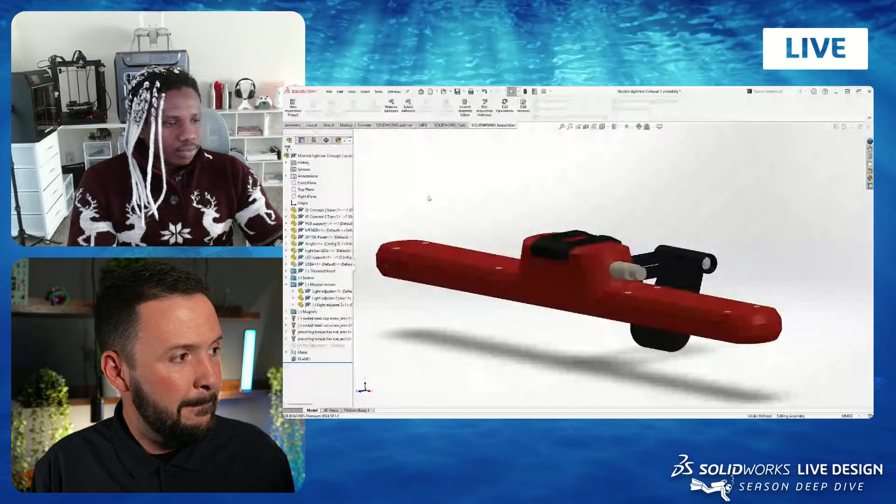Awesome, so what are we looking at here? Okay, so this is the monitor light bar. I designed this as the enclosure. Let me make this transparent a little bit, and then you can see all the electronics. I actually designed this thinking about all the components I need to use, and designed all those components in SolidWorks so I can make sure everything fits just fine. So this is the enclosure, and this is what holds it to your monitor.

So in a few moments, I'll be diving into the design process, the thought process, what I do to get to this enclosure.

I love it. A friend of mine posted on LinkedIn today—she was at a talk, and the person giving it gave a remarkable quote: 'I don't want you to leave this space heavy on ideas and low on execution.' That's why I love today's talk, because I feel like you're going to give us both ideas and how you execute, and how people at home can execute too when building enclosures. So yeah, man, I'm looking forward to it.

Let's get rolling. Okay, so first of all, I have a couple of slides I'd like to go through. When I'm approaching design, I like to approach it as a mechanical engineer and also like an industrial engineer, and you'll see that in a couple of seconds.

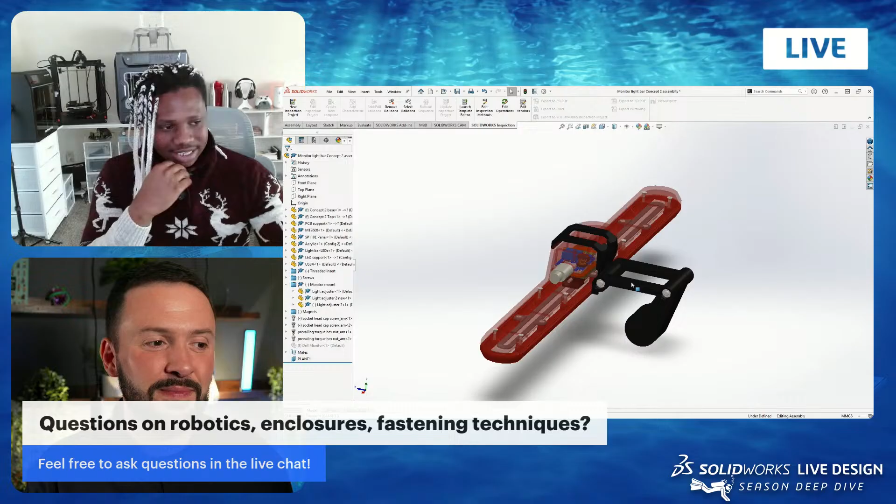I'm hopefully going to try to run through the slides very fast and then jump into SolidWorks, because I know that's what everyone is here for. The slides are mostly diagramming and examples of your work and sketching. You're not leaning on slides—you're giving proof of concept of what you're about to do. So yeah, let's see it.

Okay, so yeah, this is like a presentation image I did, and I actually rendered this using SolidWorks Visualize. There you go—Jesse Sprague will be proud, he's a member of my team. Some of you have seen him, but yeah, he would love this.

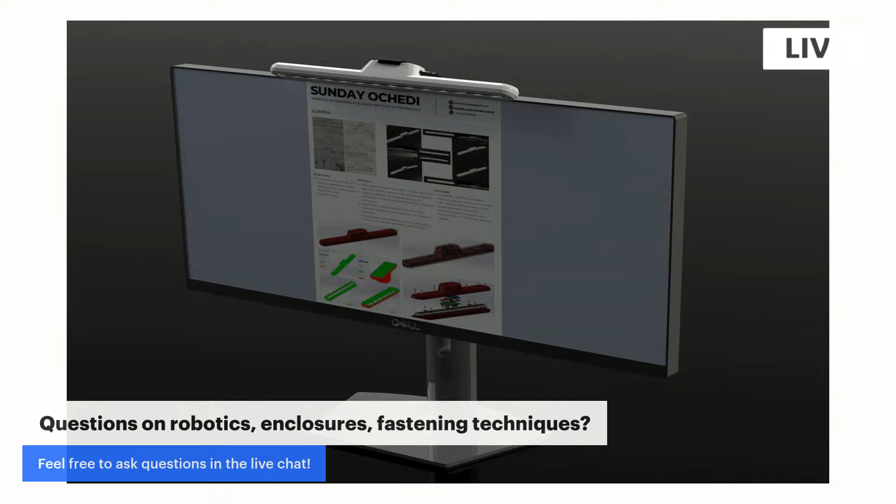Okay, so like I said, I like to think about design like a mechanical engineer and also an industrial design engineer. What I do is think about an idea—for example, the light bar design—and then I go online to look for different designs that exist, so I can think around it and see what I actually want. This is actually called a mood board, that's what industrial designers call it. They paste in whatever image relates to what they want to design, or something they can pick an idea from. So that's what I try to do.

I also try to make use of ChatGPT a little bit. So I taught a sort of mini course at 3D Experience World this year on different ways to use AI in a SolidWorks context, and I'm curious here, as many of us probably are in the chat, what was your prompt? What did you ask it for?

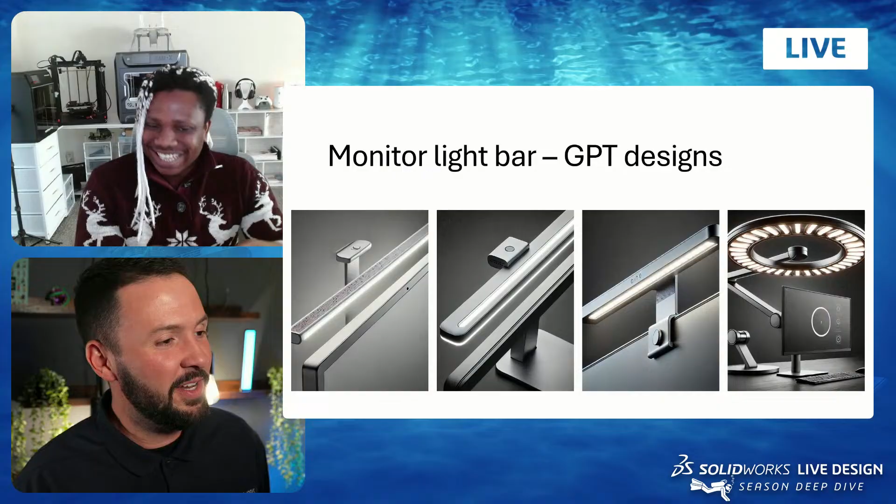Okay, so what I do is I just typed 'futuristic monitor light bar design.' Sometimes, like I always say, if you really know what you want, be very specific. But if you don't, and you want to be surprised or just get loose inspiration, be loose with your prompts. So I like to play around with ChatGPT—once I give it a prompt, I tell it to do something.

I would say maybe another, and then it comes up with a new picture, and then I tell it, okay, I don't like this feature, change this. That's what I like to do. I like to play around with the idea, try different things, and so ChatGPT keeps spitting stuff out. So I just pick the features I want, and then I come up with my own design based on everything I've seen.

Sweet, yeah, it makes sense to me. So you got your mood board, which people use for their lives, the future of their lives, they use it for projects, right? First time I heard it, I was like, what is a mood board? But you explained it so well.

And then you use GPT, a generative AI, to kind of give you different ideas. That's part of your process today. So this is a very modern process starting out here. I love it, yeah.

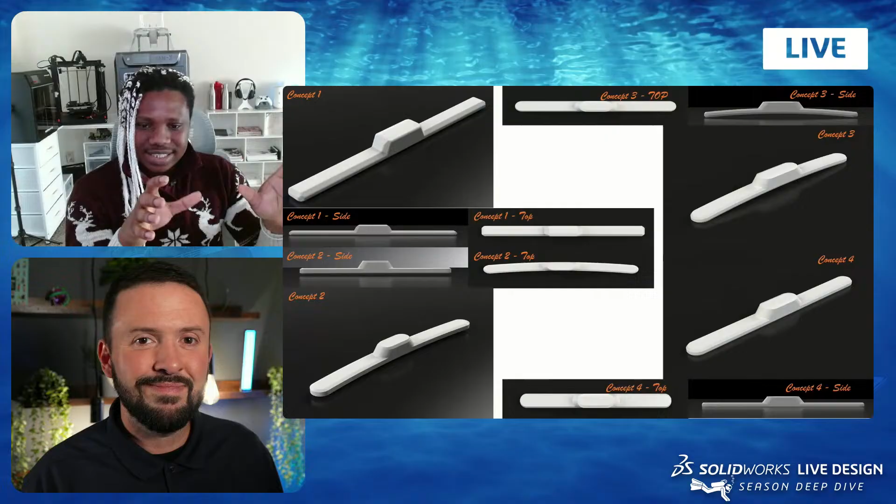So what I did was, after coming up with this concept, I actually sent it out to my friends. Oh, okay.

So first you do generative AI sourcing for the ideas, and then you refine it, and then you're like, all right, friends, let me know what you think. Let me check in with the humans. Yeah. So I send this out to them and tell them, okay, this is what I'm looking at. I want to design something like this, but which one resonates with you? Which one is easy, simplistic? Because that's the most important thing about design, making something simple but still eye-catching.

Sure. So most of them looked at it and told me that they actually prefer the second concept, I think. So that's concept two. No, the fourth concept. Oh, sorry. Concept 4. Okay. So your friends preferred it, and let us know in the chat which one you preferred. Obviously, this project's over. It's done. We're about to dig into it in SolidWorks, but let me know if you would have gone with concept 4. Let Sunday know if you're like his friends, or if you have other ideas.

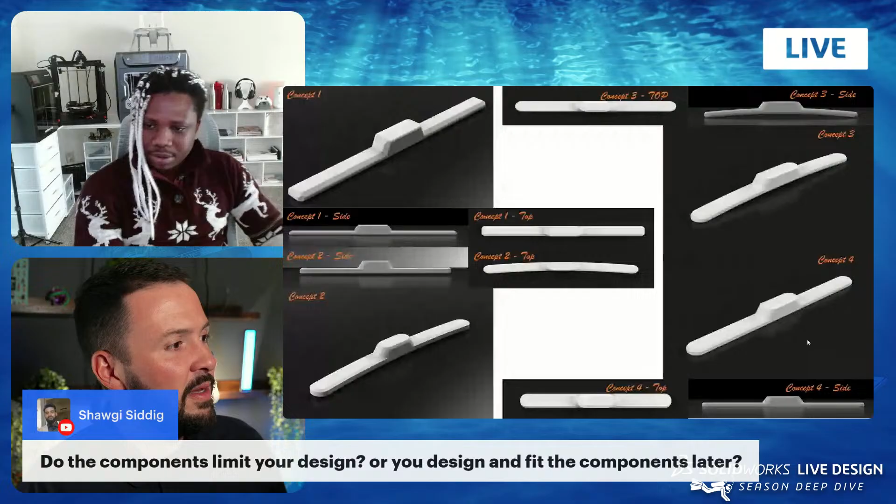We do have a question here from Shawgi. I apologize if I'm mispronouncing your name. So, Shawgi asks, do the components limit your design, or do you design and fit the components later? Okay, so they actually do limit the design, but something I like to consider first is, if you do have the physical components, you can stack them up and look at how you want to position them. So the main thing is I wanted it to be slim, and then I considered how I could place those components to be that slim.

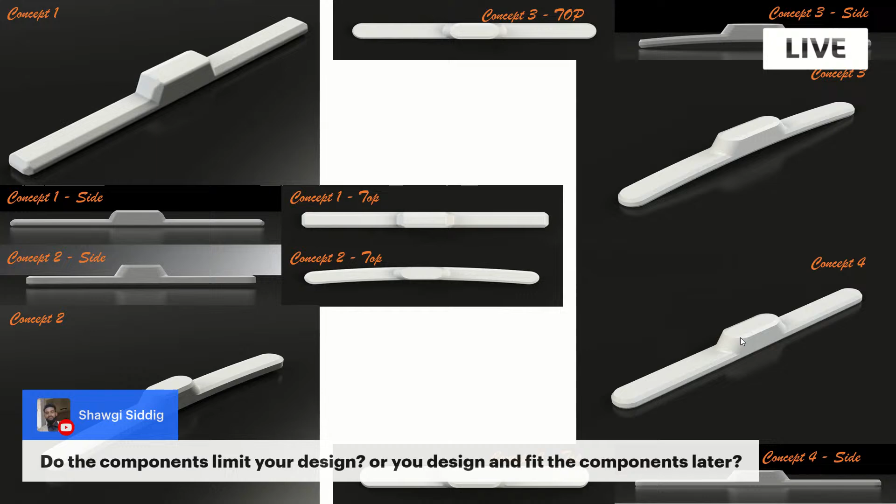And if you notice this, you have this bump up here. That's why it's there. All these bumps, that's why they're there. So I can stack up the electronics. Ah, then I see. Yeah. So the idea is once I have that, I could just make adjustments to the height and slightly the width to adjust everything. So it does play a role. It does limit the design process, but not that much for this particular design.

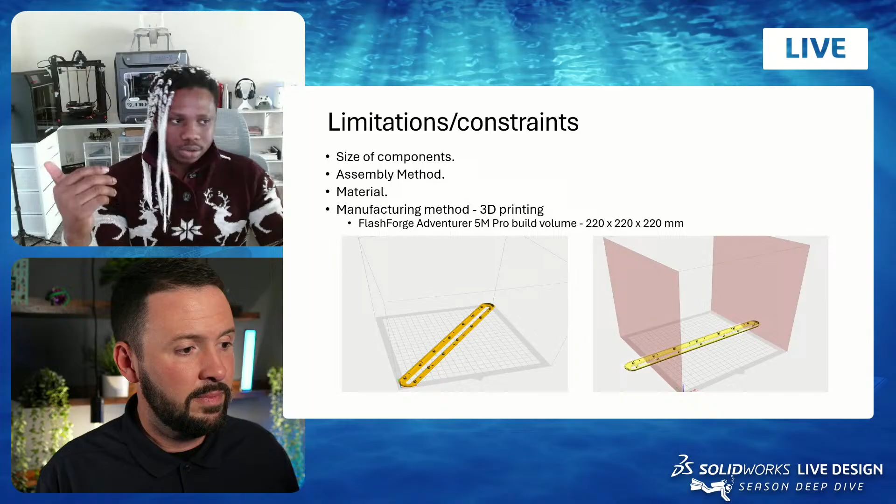And as you can see from the images I have, if I were to place it completely straight, I wouldn't be able to print that. So I kind of rotated it. And this actually played a role with the dimensions of the monitor, the design. So that's what you consider. Manufacturing, the size of the components and stuff like that, they're always important when you're doing the design.

So Sunday, we have some people just joining. If we could take a look at the SolidWorks model maybe one more time before we jump into it pretty soon, just to show people what we're talking about, because I have a question here as well. So you mentioned, of course, the build volume of the 3D printer. That is, of course, of consequence here, given what you want to use, type of material, the type of manufacturing.

Of course, you could print this. I'm not saying it's a good idea, but you could print this in a number of different pieces and then adhere them together. So what was your goal? I'm guessing in this instance, you wanted to have one continuous print.

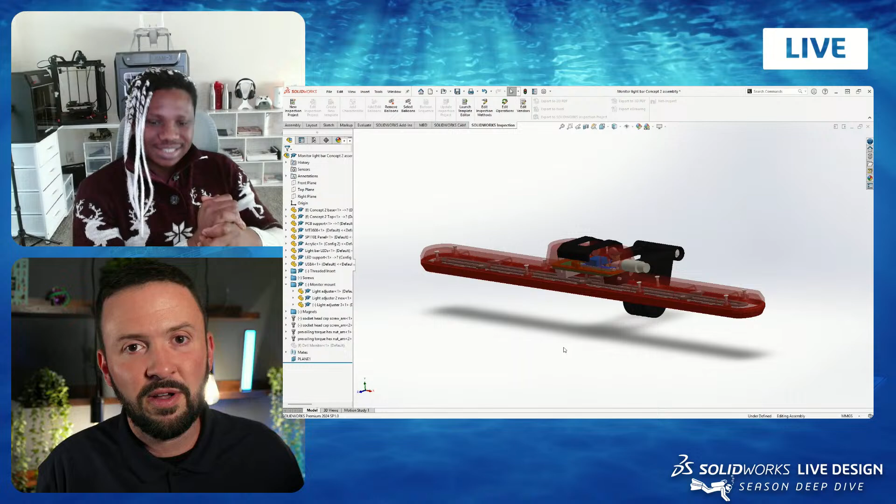Yeah, so I actually wanted to have a clean look. A clean look, yeah, that wouldn't be as clean, right? Or it would be really hard to. You'd have to do a lot more steps just to make it look like what it isn't, which is a continuous kind of surface and that kind of thing.

Yeah, so like I mentioned in the requirements, aesthetic is really important to me. So I wanted everything to be one piece, so it has a clean look and basically it's appealing to people.

Cool. Yeah, man. Thanks for jumping back in. We'll be back in SolidWorks, of course, very soon. But if you have more kind of pre-steps to look at, let's take a look.

Okay. So, like I said, manufacturing is very important, something you have to consider when you're choosing your dimensions and stuff. So next, I looked at existing designs, as I've said previously, and then I looked at the dimensions of most of them, and this is basically the dimension range I found for most of the monitor lights.

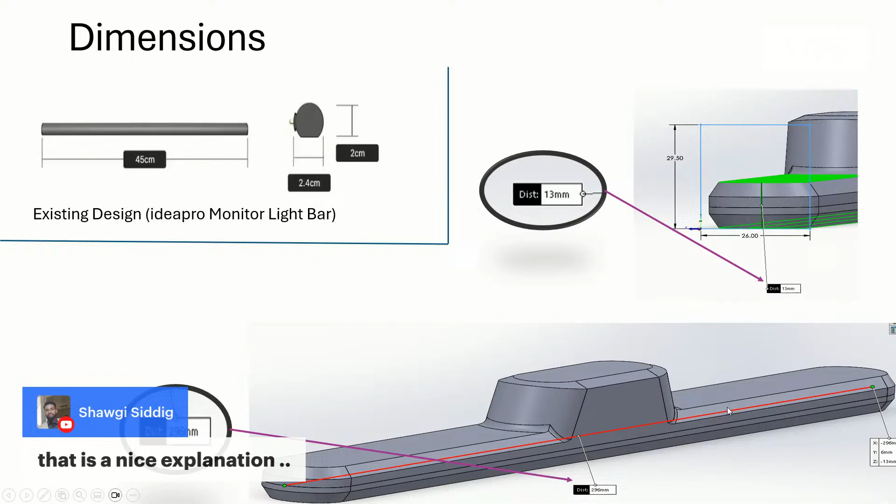So I decided to go for something maybe slimmer within that range, but try to accommodate my components and stuff like that. And that's what you see here. These are my dimensions for starting the design, and you can see this is the total length of the design, and this constraint comes from the manufacturing I already discussed before. That makes sense. Yeah.

So now to the part everyone has been waiting for. All right. There's a lot of different ways that we talk about this specific phase of the process, right? Where you don't just jump into SolidWorks or a tool like SolidWorks and just start doing stuff. Typically, you have your phase where you're thinking through what the structure is going to be

of your SolidWorks model. Like you said, you were sketching some stuff up, you did a rendering, sent it out to your friends. But as you start to think more about part, assembly, sub-assembly structure, how are you going to get into it? It's like a pseudo modeling step. So yeah, talk us through it.

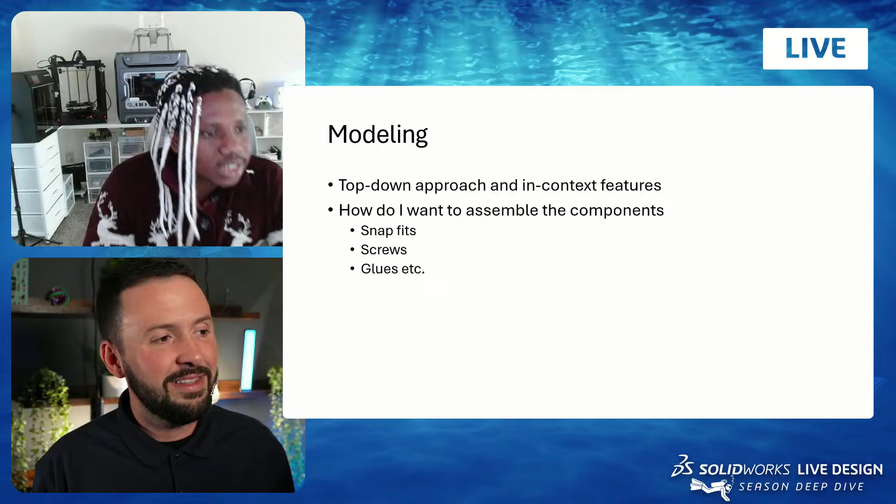Okay, so I actually use the top-down approach and do a lot of in-context modeling. I'll still talk about assembling the components, but right now let me just jump into SolidWorks and show you a little bit of what I did. So this is the final design that I currently have, the assembly. But before I got to this point, I started with this. So this is one of the base models, almost like one of the renderings that you send out to your friends, right?

Yeah. So this is the master model I used, and from this I did so many other features to bring it to what we have right now. Let me roll back and go through some of the features. So you can see this is just a chunk of block. Yeah, it's come a long way.

Yeah. So that's one thing with designing. You have to think your process through. Sometimes you can't, so you just jump into it and do whatever comes to mind. And that's what I like to do. I like to play around with blocks a lot.

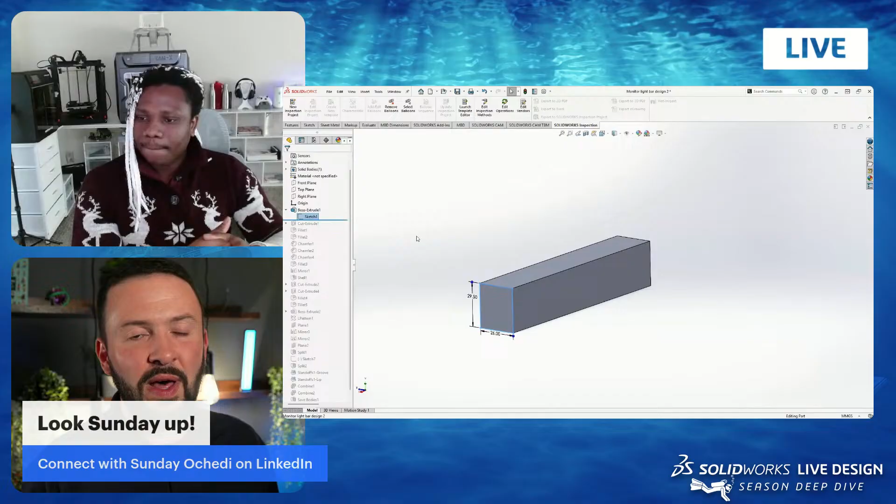So for our beginner users, a lot of us who have been designing in SolidWorks consistently for maybe over 2 years might know why you did this. This is often referred to as your base feature, in other words, the feature upon which and from which everything else will be built, right? So why did you choose a rectangular prism for the base feature in this case?

Okay, so basically what I was trying to design, the main shape is actually a rectangle before you add anything else. Where you start taking stuff away. Yeah, so basically just a block, and then you cut things away, chamfers, fillets, and then you get whatever you want. So that's why I started with this. It's a simple way of going into the design.

Gotcha. Josh has been there. Here's a pretty picture. Now engineer it to make it real.

Yeah, so once I had the square, there's the limit I want to go. So this way I can easily come back if I want to adjust my height, my width. I can easily come back here and just adjust it, and everything changes and updates. But

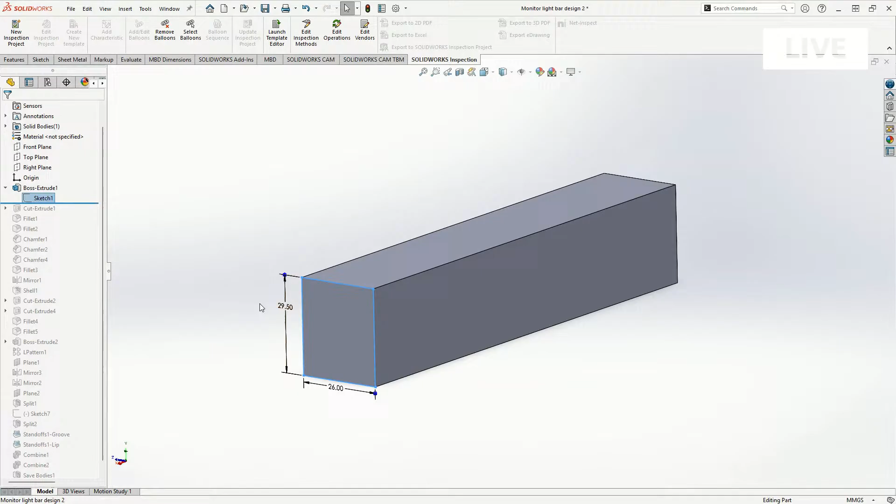SolidWorks, you must always have some features that fail no matter how you try not to. But yeah, there were a few features that failed, but not so much, and just easy modifications and then you're done. So, yeah, my design thinking here was quite okay. So

And then the next thing I did was to cut out the cross section. And just a little bit of context: since the design is meant to be symmetrical, I'm starting by designing just half of it, one part of it, and then I can mirror it around and get the full design. So this is half the design. And right now we're getting to the shape we know and love.

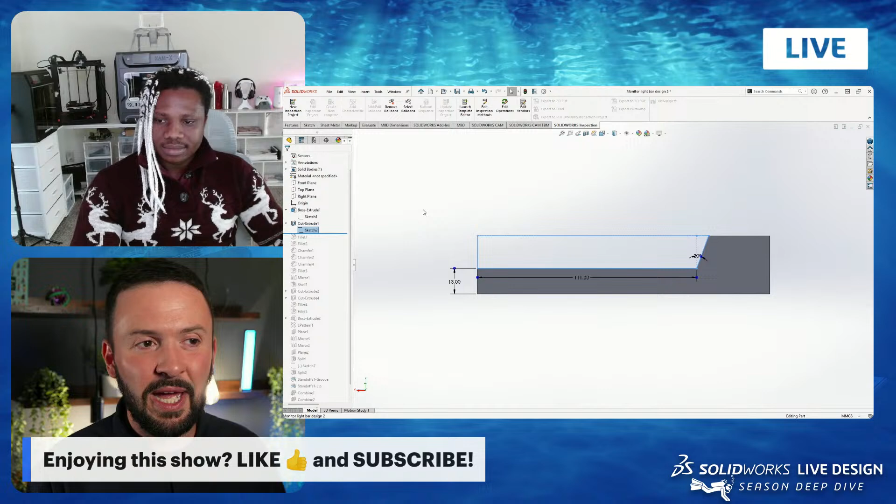Yeah, but it's crazy. It still amazes me, however many years of using SolidWorks, how things can really take shape from the first feature to the second feature in a tree. You went from just having a rectangular box where, if you're a beginner user, a lot of people would think, why didn't you make this a different shape, or why did you choose that specific length? And then as soon as the second feature rolls down and loads, it's like, all right, I see it. I see where you're going.

Yeah. So the next thing I did was to do some fillets just to get this curve. Most of the time it's good to have your fillets at the end of your process, but sometimes you can't avoid it, or sometimes you just want to see how the design looks, so you just put it in and see if it goes well. I think that was actually the case here, so I just put in the fillet there.

And also considering the fact that I'm going to do a mirror, I want all the features to be there. So I added my fillets to get the nice curve on the edge, and then some chamfers. And now we're really looking good. It's getting close to what we have. And I think there's another layer of fillet. So we have this, and I was pretty much okay with this.

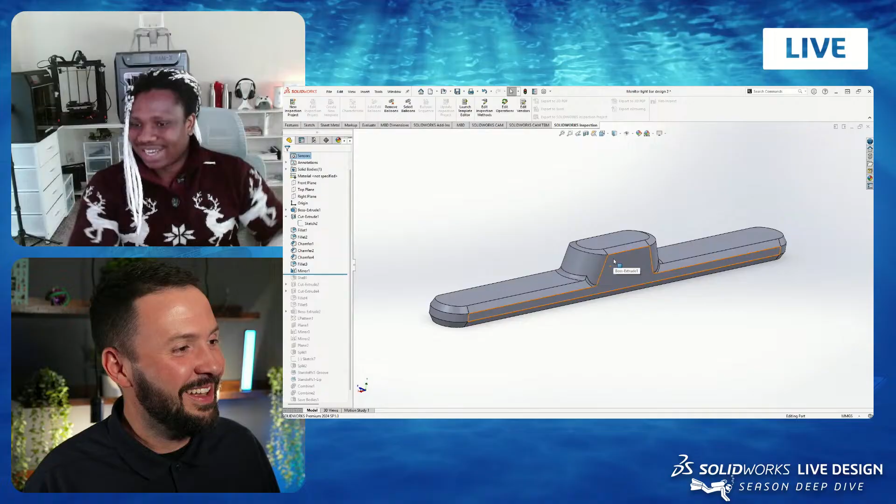And the next thing I did was mirror it. So we have the complete enclosure design, but everything is still solid inside. So this is actually what I sent to my friends: okay, take a look at this. Is it nice? Is it okay? And they gave me a thumbs up. So I went with this design.

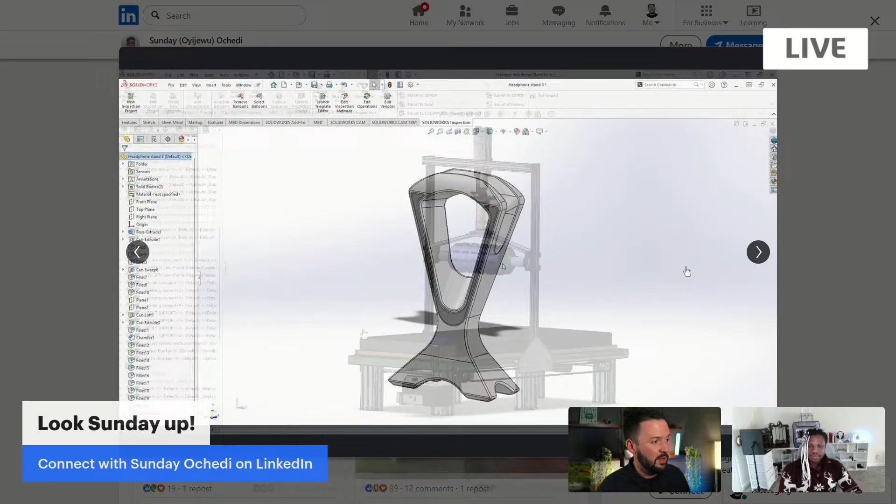A lot of them we've seen, and it's actually how I came to know you, on your LinkedIn, right? So I wanted to just take a minute here to plug you. I usually save this for the end, but you have a lot of really neat designs here. Maybe you could talk through a couple of them as we cycle through.

Yeah, so most of my designs are actually inspired by some things I see, and some of them are actually products. And most of these designs you're showing right now, like this one, are designs I did way back when I started using SolidWorks. So it was kind of a learning process, doing a lot of stuff. This was actually one of my first designs, which is really not that great, but over time I got good. I try to integrate mini industrial design stuff as well as mechanical design stuff.

And one thing I always do is I never shush someone when they're trying to explain something to me, even if I know it. It's a process of learning. The person has a different way he does something. So once the person says it, I get that idea. It's like an extra tool in my toolbox. So yeah.

Just before we get back to SolidWorks here, this one really blew up. Yeah, this setup here. Let us know in the chat if this is a bit too much for you, or if you would love this setup. I know we all have our preferences, but tell us a little bit about this before we go back to SolidWorks. Let's spend some time here because I think a lot of us would be curious about this.

Yeah. I actually had a lot of people in the comments complain about too many screens, and I had to explain to someone that all the screens there have their purpose. So I have my two monitors there. That's basically where I do my design and stuff. And then my laptop on the side. So I have everything I need on those screens. I use one monitor to work on SolidWorks, and the other one to open maybe specs that I want, or to look for components online that I can fit in, stuff that I could buy.

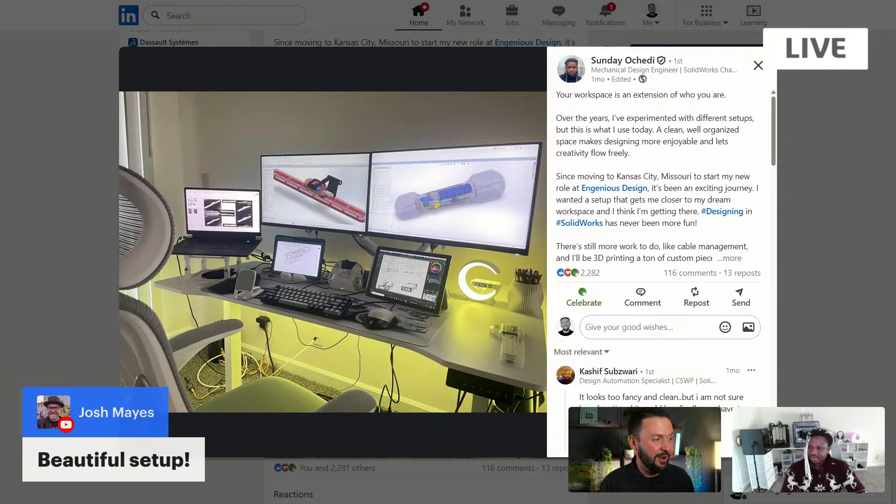So now back to CAD. Okay. So after doing this, because I already had this set up, the next feature is to shell. Yeah, I'm always anxious at this step, whether it's gonna shell or not. Although in recent years, I feel like SolidWorks has definitely gotten better about telling you what doesn't work. I think the shelling feature mostly has problems with your fillets. Yeah, that's major. That's what made me nervous about this one, but you got it to go and it looks clean.

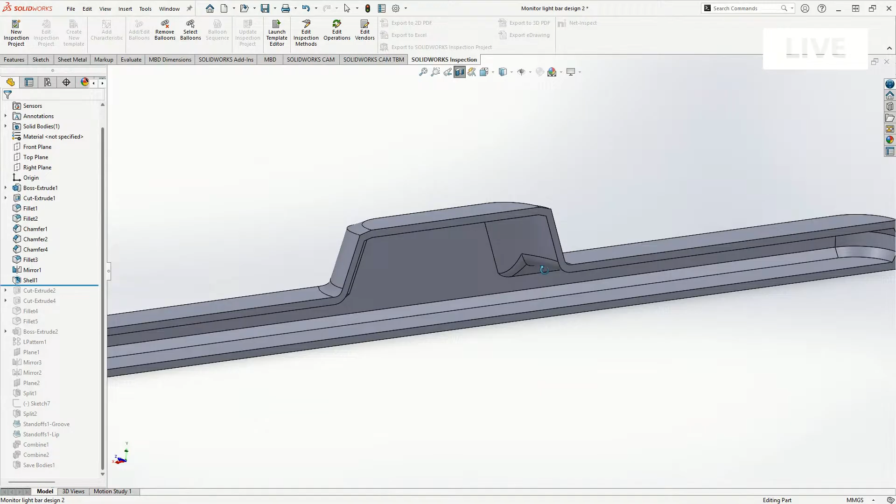Yeah, so you have to play around with your fillets to ensure that you get something good, especially at this point. There's one important thing when it comes to designing to produce, especially DFM, when you're trying to do injection molding or something. You have to have completely uniform wall thickness. That's one of the things you need to do. In some areas you might deviate from that a little bit, but it's always advised to have that.

And the shell feature actually tries to do that, and that's when you get an issue if the fillet is too small, because it uses the outer fillet depending on if you're shelling inwards or outwards. So it uses the fillet's diameter or radius. So you have to adjust to fit what you want and ensure that you have a good shell feature. In my case, I'm using a 2 millimeter thickness for my enclosure.

That property manager is pretty simple. There's not much going on. Like you said, you define the wall thickness, any faces you'd like to remove, which you don't have to. And then a couple others there. You could do multi-thickness if you wanted to have differing thickness at different areas of the model. That's a really good tip, especially in regards to DFM, design for manufacturing.

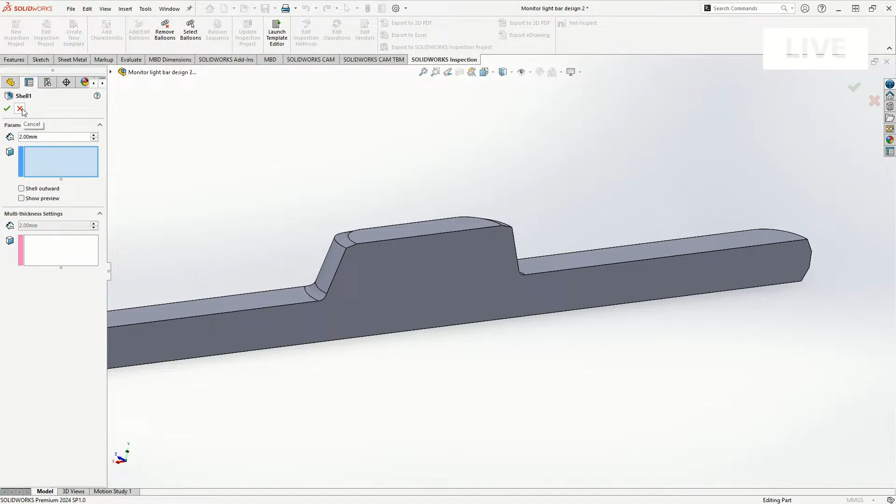I wanted to ask you how you acquired some of this knowledge and some of these skills in terms of making enclosures. Do you find you're doing them more for your job or more for personal projects these days? Or maybe equally so, as part of your day job as a mechanical design engineer? It's mostly personal and then a little bit of work stuff, but more personal.

We could probably have you back for a whole lecture on robotics, which we probably have to at some point. I would love to be back. Yeah, man, this is great. I'm having a lot of fun.

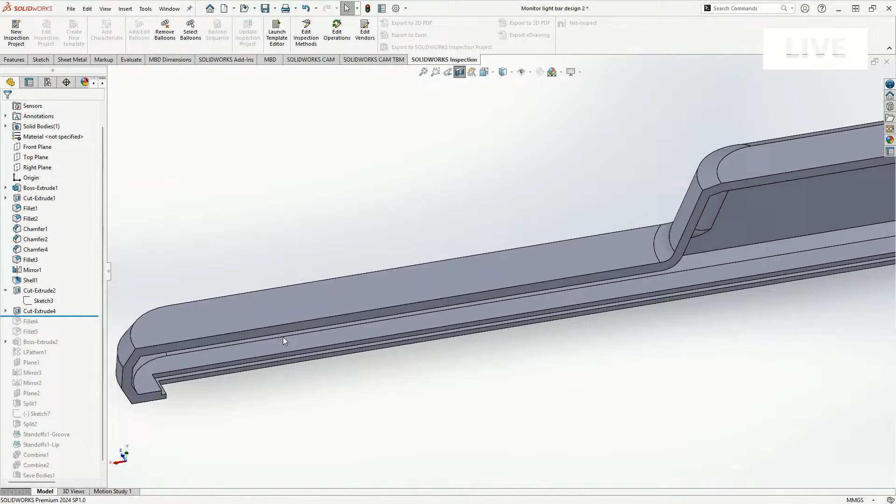So we've just shelled the model. So where are we going now? So now I'm trying to make a cutout for the LED lights that I'm supposed to put. This is the cutout I made here. Oh, interesting, I see. That's where the light is supposed to shine through. And after that, let's see where we are now. So this is the next process.

This is kind of a platform where I could lay an acrylic sheet, so it's transparent to allow the light to flow through and also hold the light in place. Oh, okay. So that represents a different type of material. But so far, SolidWorks wise, you haven't defined a material, and that's fine for the purposes of why you're doing this. That's good to know.

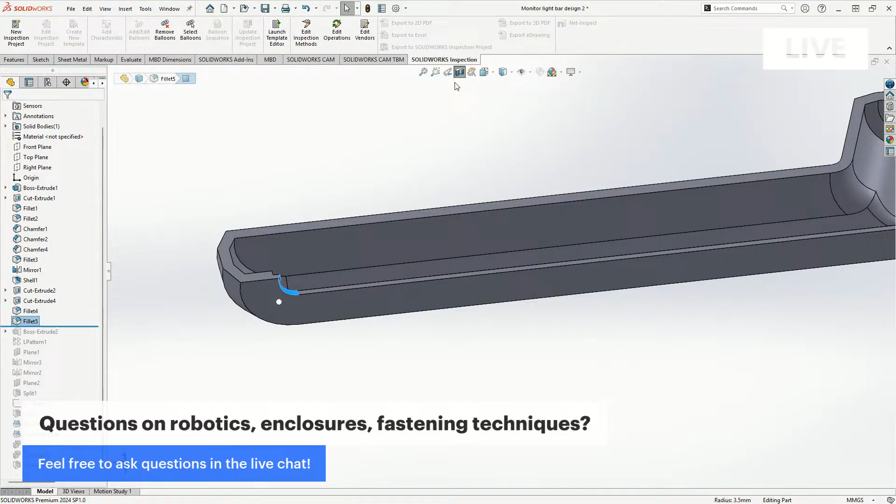So I mostly define materials when I want to know the weights and stuff like that. But most times I like to print with PLA because it's actually good for a lot of stuff I do. They don't really have much engineering requirement; that's most personal projects I work on. And even if they do, I play around with PLA to get the sweet spot. So I did a few fillet features to shape it so it looks a little bit nicer outside to follow this curve.

Now, of course, this is an enclosure for LED lights, right? So I guess at this point you are considering how the light will cast, right? Yeah. Cool.

So from here you could move to splitting the part. But what I did was I created some extruded bosses for screws, which you can do with a SolidWorks feature, the fastening feature, and just do mounting bosses. But here I just did an extrude myself. That feature, man, I haven't seen anyone use it in so long. Let us know in the chat if you do use it. That's definitely a rarity and a bit of an Easter egg during this episode.

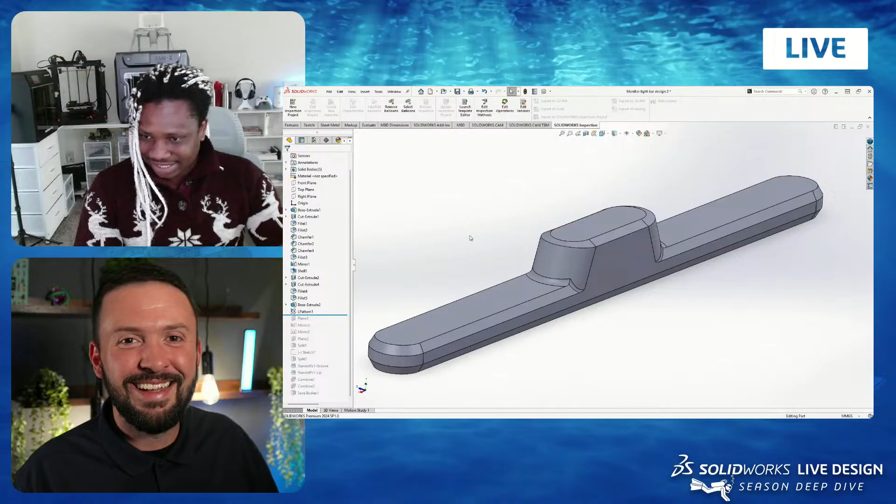I'll actually show it because I used it somewhere else in this design. Oh, cool. They're gonna see it. Very nice. So I did this and then just mirrored it. So you got a pattern and then you've mirrored it.

Let's try to go a little bit faster. The next thing is to split it into two parts, the top and the bottom. So we use the split feature, but I don't actually know where to find this.

Most times I just use the search command because I know what I want, and it comes up. Honestly, even working at SolidWorks, it's still the same thing - if you know where to find your S key on your keyboard, you know where to find almost everything.

Especially now, just to drop a quick tip that came out a few iterative releases ago - I believe in 2025 SP2 or FD3. We've actually improved command search. If you go into options, into Tools Customize, the same spot where you'd look up keyboard shortcuts, under the keyboard section, you can now add extra search terms.

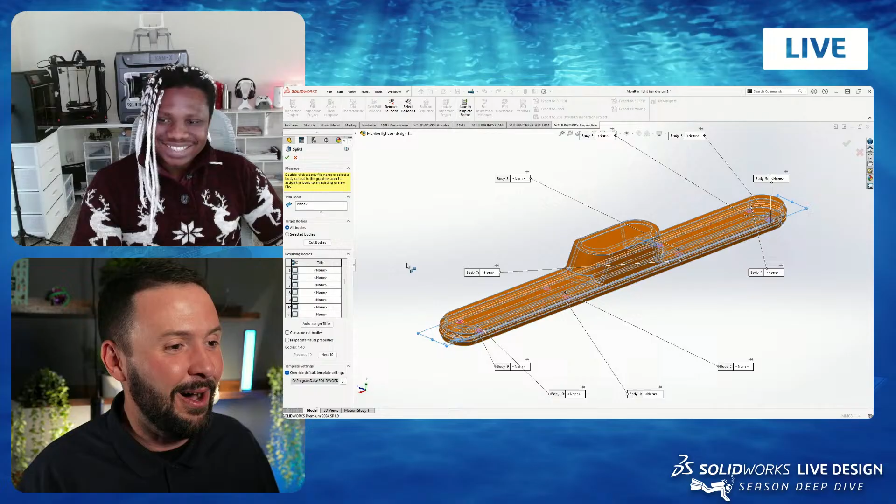Split's pretty obvious, but I'd say you're splitting bodies... maybe, yeah, it's not obvious. I don't know, but I just wanted to throw that out there. Yeah, that's really cool to have.

So when you're using the split feature, normally you can assign a title to it, and once you click OK, it saves the bodies separately into separate files where you can name them what you want. But here I'm not doing that - I don't want to save it into separate files yet because I still have a lot of stuff I want to work on before saving it as a part file.

So what I do is I don't click on assign name, I just click on the two components I want - these are the main components. We have all these other components because of the extruded boss I did, then the linear pattern. I didn't merge them with the existing parts, so that's why we have a lot of them there.

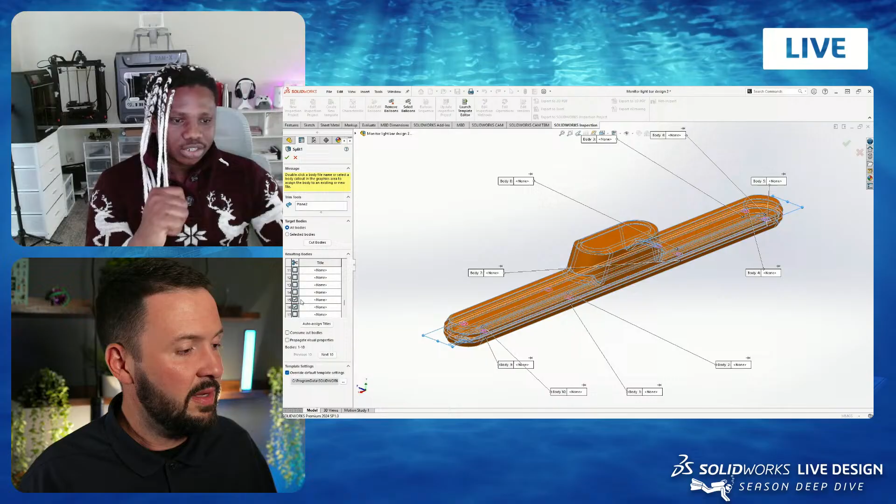So they kind of act as body splits in and of themselves here. I just took the two I needed, the top and the bottom, and clicked OK. So it splits the bodies into two, but you also have the other linear pattern and stuff there. That way I could work with two of them.

The reason I didn't save them into different parts already is because I wanted to add a lip and a groove, so these components can easily mesh together and you can screw it easily. You don't want just a flat stop or something.

You mentioned at the very beginning your sort of pseudo modeling plan was to maybe use some in-context features. Split in a way is kind of like that, right? You're basically building everything within the context of itself, the original context. Once you break them out into their own part files, of course they're going to fit together unless you alter them after - they're built together. So yeah, I think that's a pretty wise approach.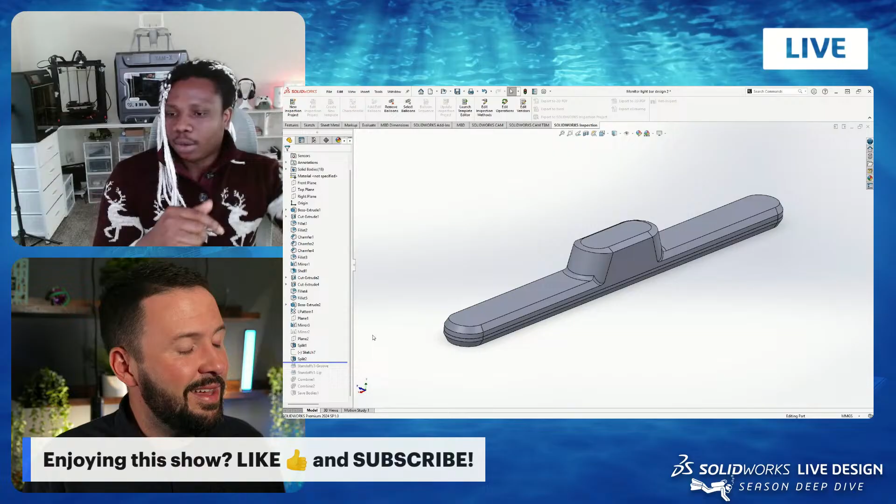I did it this way so I can easily, if I notice something with the assembly that I want to add, do it in this main master model, and then it updates in the body and goes back to the assembly. So it's something easy I can work on.

So the next thing I did was a lip and groove - basically just so they... look at that, yeah. Man, this is another one no one ever uses anymore.

Before, I would come up with a sketch myself and try to do the dimensioning behind that. But with the fastener feature, you can just go down to lip and groove, and it's an easy tool to use - you can just play around with it and stuff like that. So this is how it looks like.

That's a great use for that tool.

If you guys have SolidWorks, add that extra shortcut for the search menu. Just add Sunday for lip and groove. Forget the name, you'll remember who said it. Yeah, that's a great use of that tool.

How did you, just out of curiosity, like we're all learning at different paces, different times, different years, come across that feature, the lip and groove feature initially?

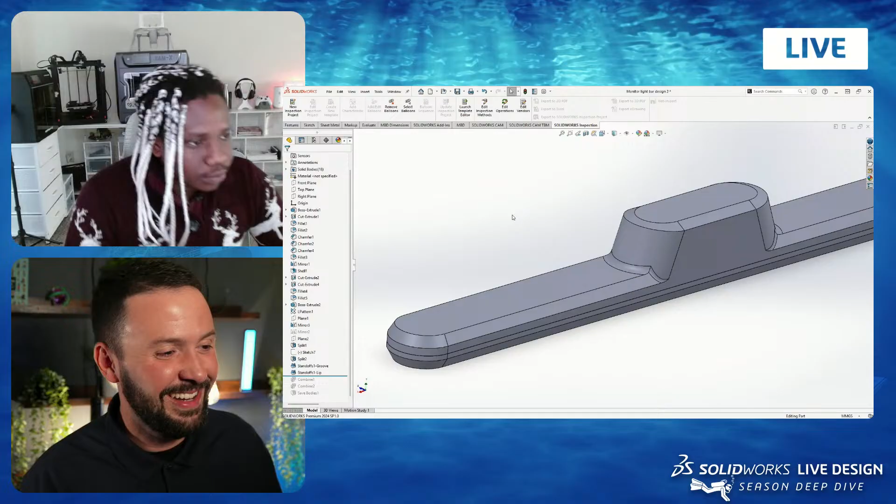I've actually forgotten, but I forget a ton of stuff. I think I got it from a YouTube video because I always like to look at design videos on YouTube. That's a good way of improving yourself, because you end up learning something that you might use later on, but you don't know it yet. And then when you're working on a project, it comes into your head, and you're like, yeah, that's good.

And I know we've all been here too - if you don't remember exactly what happened, that's what your YouTube history is for. Just find the video, rewatch it. YouTube is a really good tool - SolidWorks has a lot of people posting videos, so it's easy for you to get what you want. And if you don't see it, what I always like to do is spend a few hours playing around, and then you finally get it. Once you get it, it's hard for it to go.

Yeah man, you can always do file, new part. For some reason the feature is not actually opening, I don't know why, so I'll just keep it for now.

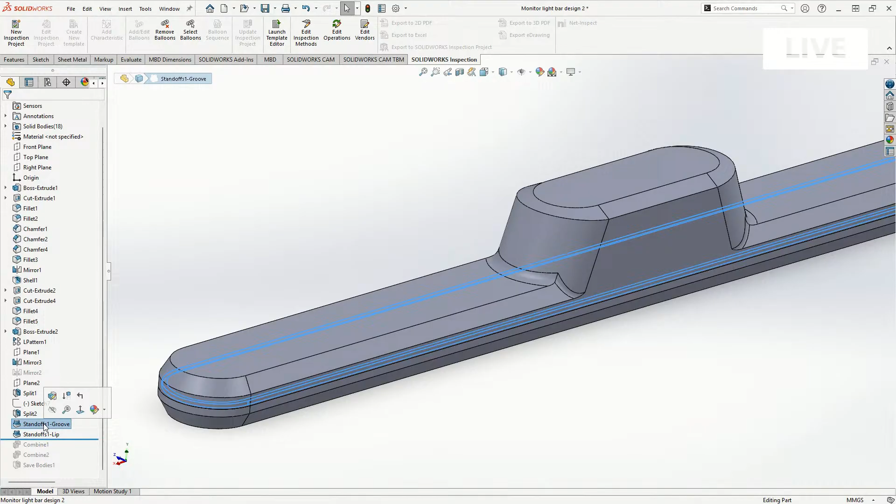What was the intent of that one there? What's it doing? The lip and groove feature - you just add a little bit of the thickness you want to leave, this height, and then the distance you want to keep between the two components, just like clearance so they can fit in together. And when you're doing this, you also consider the tolerance of your manufacturing method.

For me, since I'm going to be using a 3D printer, I consider that. I normally give between 0.2 to 0.5 because that's what I found most of my printers are within that range. So whatever I do that way, it fits in. That's what I do.

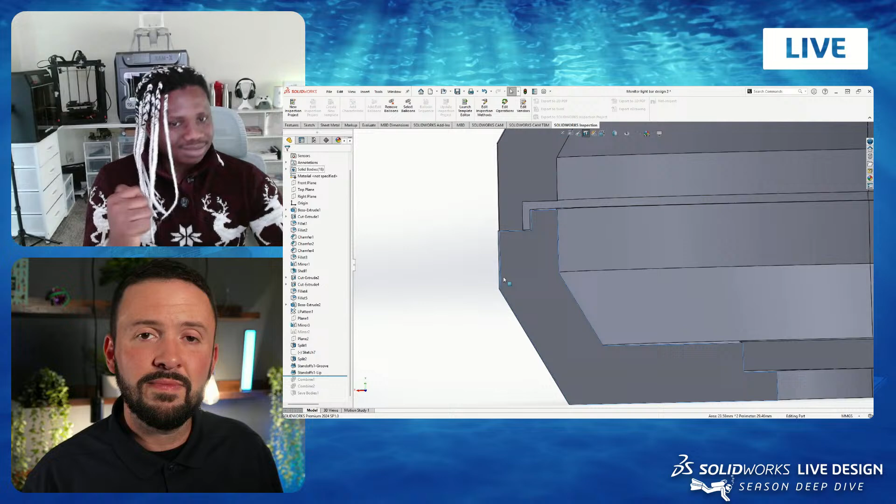And then here as well, so it mates and you have this flush to this, so that's why you give a gap here. Because if it's completely flush, like I said, your manufacturing method may ensure once this face touches, there might be a gap out here, and you want to make sure this is completely sealed outside. So that's what I consider.

So after this, I just combined the features I have, and then I saved the body. To save your bodies, you go to the solid bodies here, right click, and then you have save bodies. Once you do that, you can save them and give them whatever name you want, and then it's saved.

And this is actually good because whenever I come back here to make a change, all I do is just roll this back, do whatever I want, and then drag it back. It saves back to the part I already have, and then I can use that in my assembly.

That's very cool. It was like when I first started learning SolidWorks, the history-based nature of this and how you can use that to your advantage with the rollback bar. I continue, all these years later, to appreciate that to this day.

And I wanted to mention too, like you mentioned, save bodies - of course you just go up to the bodies folder, which will automatically, by system default, display if you have more than one body in a part.

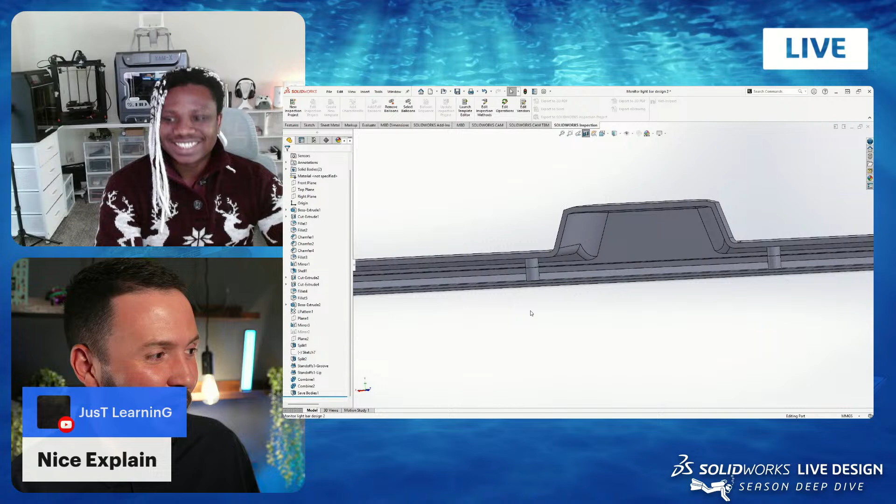Very cool, so I wanted to give a little bit of context for the combine features. We have two combines because we have two components, majorly the top and the base. Remember, before I did an extrude where I wanted to put my screws and stuff, so I also split this. So the combine is to combine the top part to its associated top or bottom pieces, and the second one is to relate it to the base.

Awesome, thanks for exploring that. I actually wasn't clear on that either.

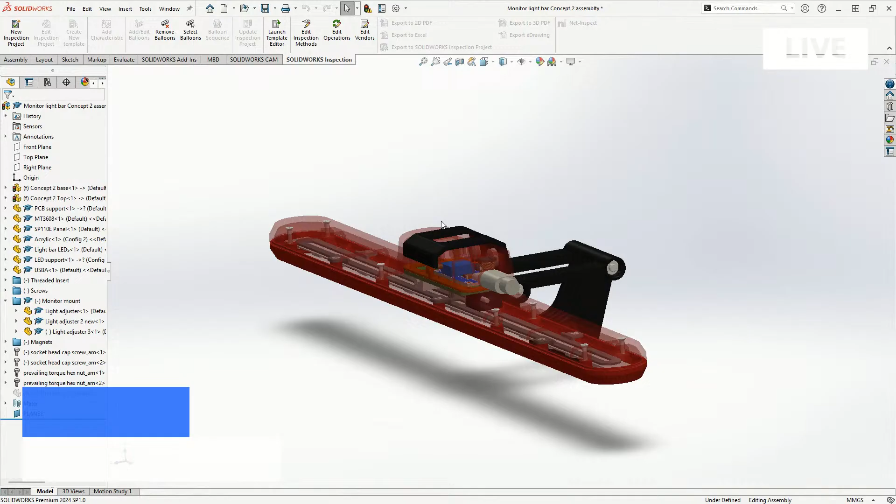So let's jump back to our main model. The next thing I'll do is go through some of the components. This is the top. It's updating because of some of the features I touched in the previous one. You've got a lot of linkages going on here. Yeah, so let me just scroll back a little bit and show you.

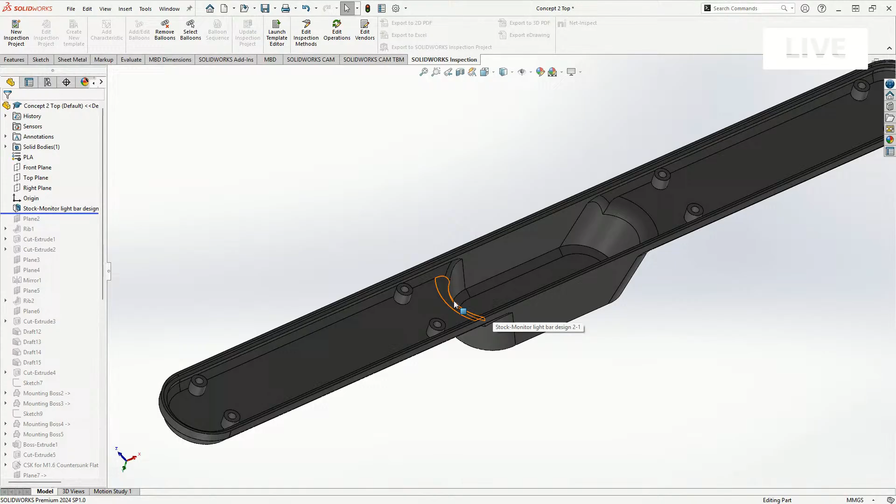So this is why save body is good. This is what comes in from my master model, and so I can work with this and see. You see the desire inherently to do that too. Like you started off that part and you already have that base feature - your last part was a rectangle, and now your base feature in this one is a very well completed, well progressed top part of your design. So I see that very well, it's very nice.

So it's just when you're designing, you try to make everything as simple as possible, so you don't have a lot of features lying around making your computer run a whole lot. That's what I try to do, and these are very good practices when you're designing something.

So next, I wanted to add some features for considering designing for injection molding. You can't always know everything you want to about injection molding, that's the thing - you always need manufacturers, but it's good to have an idea of some of the things that need to be in place. Then when you speak with the manufacturer, they can point out a few things you need to adjust and so on.

For this, I needed to add ribs to structurally make it sound - if I'm printing with small dimensions, like 2 millimeters, the rib will support it. To do that, I used the rib feature. For the rib feature, you just have a sketch which is just a line. I did a couple of lines and then used the rib feature to extrude this down.

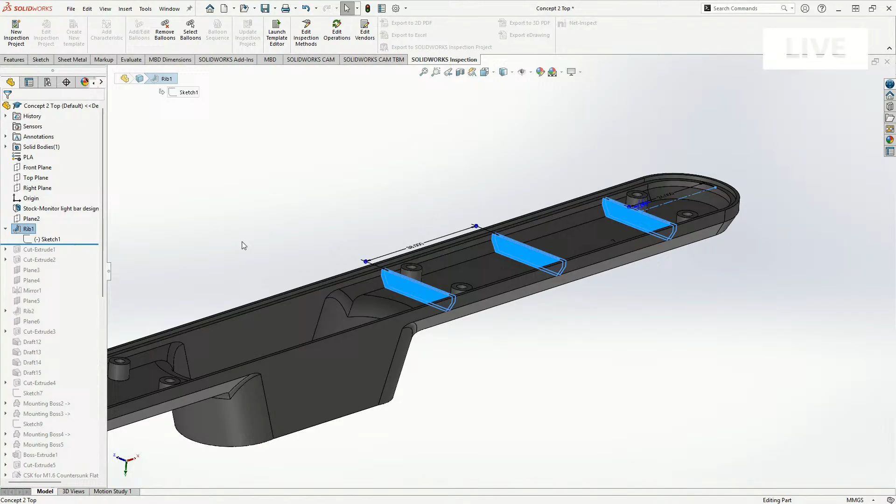And most times it doesn't always work the way you imagine. There's a lot to think about, a lot to consider, but when the conditions are met, it usually works pretty well. If you have a simple design, simple feature, it can work right off the bat, but sometimes you just have to play around with it and then you get what you want.

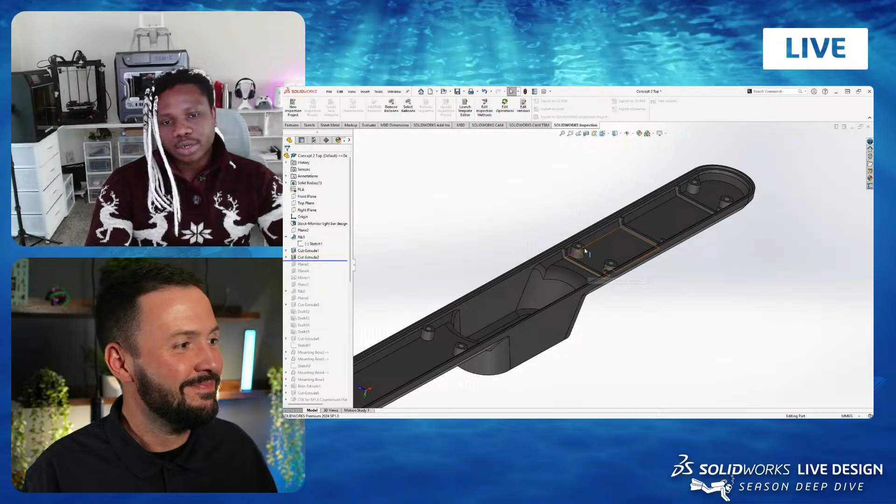Yep. Yeah. So just playing around with this and then cut them to shape the way I want it to be, to structurally support this. And there are some designs that actually have some going vertically this way, but I wanted to make it a little bit simple. So I just did this. I don't need too much feature. It's not really that important for my case.

And then I mirrored these features to this other side. Remember, I said this is symmetric, so most of the stuff I'm working on can be mirrored. So I mirrored this. And then for this part, I also did a rib, as you can see, and then cut it to fit what I want.

And then these are some draft features I did, but I'll talk about that later. For now, I'll just skip that. I'll talk about the reason why I used draft, and it's basically just for DFM, for your manufacturing. And so this is the boss feature I told you about that I'll still come to talk about.

And what I did here is there are two ways you can use it. You can use it for your screws. You can also use it as a pin where you have something just supporting components. Yeah. So components that have just small holes that you can't actually drive a screw through. So they are very useful. Pins are actually very useful.

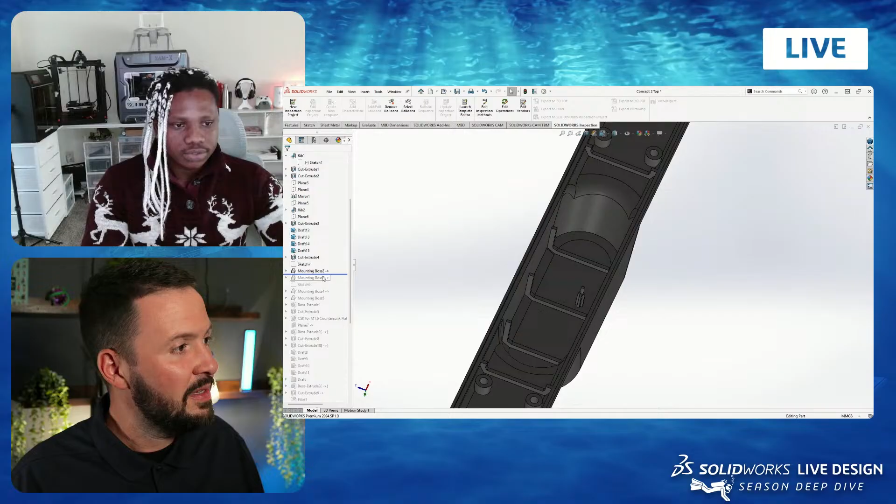And to use this feature, this is how it looks. These are all the parameters you need to put in, so you play around with it to get what you want, and this is it. So let me just go through it a little bit.

Yeah, it's a great tool. I mean, it's kind of reminiscent of using the design library to add different feature collections into a part, but it's fully curated for this specific type of workflow. Yeah, it's definitely an underutilized tool for sure. Yeah, yeah, it is. So you have a few features here.

You have a position. For this one, I use the point. So the point, you can dimension it to wherever position you want it to be. And then you also have the pin, and then this is a hole, depending on what you want to create. If it's for a screw, you go with the hole. If it's for components you just want to support, you go with the pin. And for this case, I use the pin.

And then you also have the height, the complete total height, or you want it to actually go to a face. In this case, I'm using the face, and the face is actually the electronic component which comes from my main assembly. So this is in context here. It's coming from the assembly, and then you just play around with these figures to give the shape you want to fit the components you want to hold. So that's just the basic.

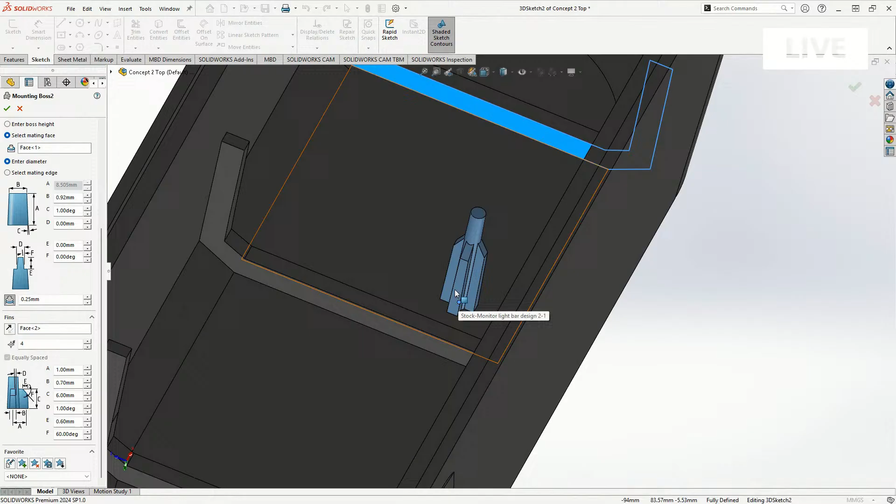And then you have fins here that you can use to support this. Once you put in features like this in the component, because of injection molding, it's always good to have wall thicknesses that aren't more than your outer wall thickness, your enclosure thickness. There's mostly a guide of 0.5 to 0.6. So whatever walls you build in have to be within that limit. And that was also done for these ribs that I put in here. Yeah, I see that.

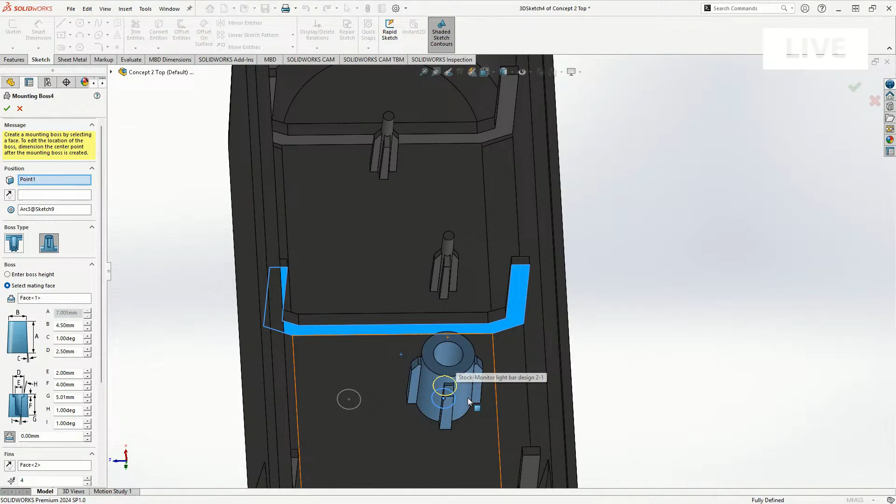And okay, this is still for the pin because of the components I'm putting in here. And then this other one, this is the mounting boss, which is supposed to house a screw. And mainly it's supposed to house a threaded insert, because that's the way I want to assemble it, a screw and a threaded insert here. And this is how it looks.

For here, I used a circle for my points, and then the face I want to make it to. So it's basically the same feature, it's the same thing. You just have to play around to get what you want. And once you're doing this, one thing I like to consider is when you're trying to put your boss to mount your screws, you're trying to put a threaded insert inside it.

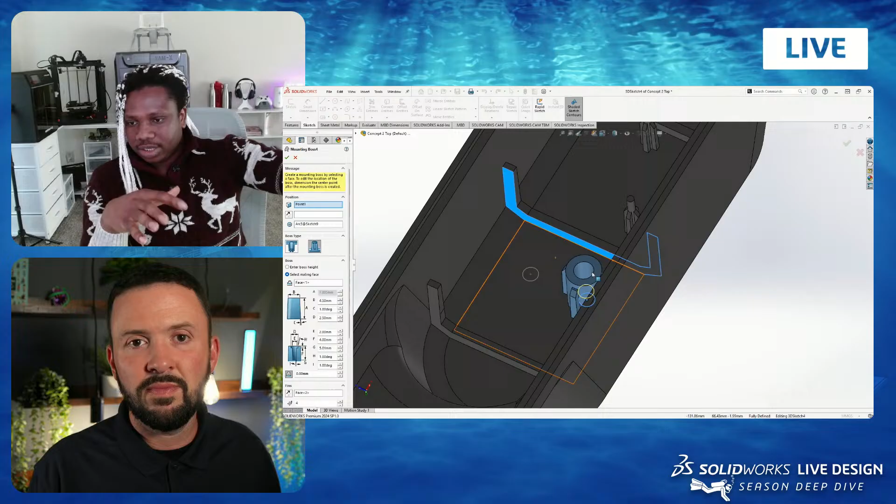So you're supposed to melt part of the plastic to hold your threaded insert. So what I like to do is, instead of giving the hole for the threaded insert the same dimension as the threaded insert, I like to add maybe 0.5 interference, so the threaded insert can actually go in. And the reason is, when you apply heat, it melts around the area, and that melted part holds the threaded insert, so it fits snug into the component. You can't easily remove it.

But one thing with threaded inserts, you also have to be careful, because torque is one important thing. If you tighten your screw too hard, it might actually twist everything and just bring out the insert, because some of them are not really strong, but when they are injection molded, they're actually pretty good.

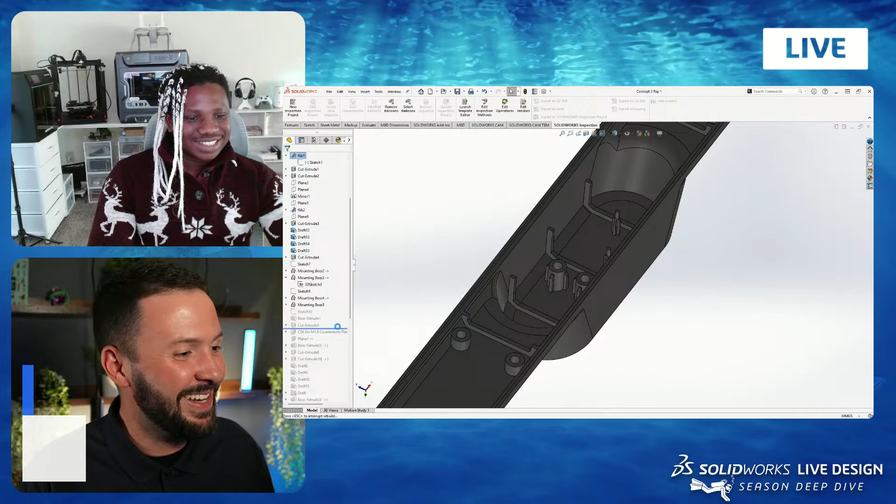Yeah, I see. Shoggy mentioned, I think Sunday is in the plastic molds field. I wish he can give us some tips about the domain in a future meeting. So yeah, there's a wish for more to come. So that's great, man. So I can give a few tips, but I'm not really into it. You actually get more from a manufacturing engineer, because they know a whole lot about this stuff. And whatever you're designing, you just do with the little knowledge you have. And most of it is actually learned from YouTube, attending webinars and stuff like that, and also talking to engineers as well. I like to ask questions. That's one thing about me. So that helps out a lot.

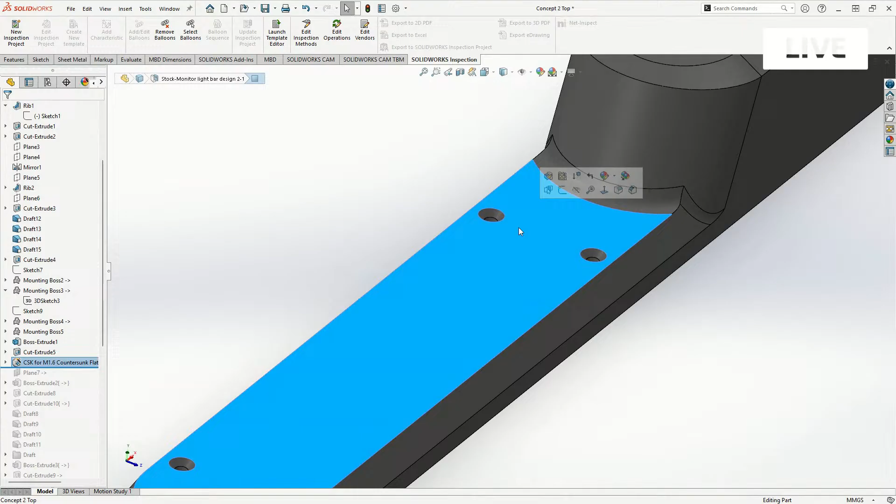That's awesome. And so the next thing I did was to add holes for the kind of screw I wanted to put in. There's already a hole here. So what I wanted to do was to add a countersink here. This is so that once I screw in and assemble everything, the screw can be flush with the surface, so you don't have the screw coming out, and that's why I used a countersunk screw, so it fits in here. You have a smooth surface up top.

So did you add the countersink after adding the cut extrude for the holes? Yeah, I already added the holes, so I just added the countersink. But you can actually do that without adding the holes. That's actually the best way to go. But I already did the process before, so I didn't want to go back again. No, I completely understand. I was asking mostly to see if there was something I didn't know about the process of doing that. But that makes sense to me. I would have done the same thing, especially if there are already references built into the cut extrude. Okay, awesome.

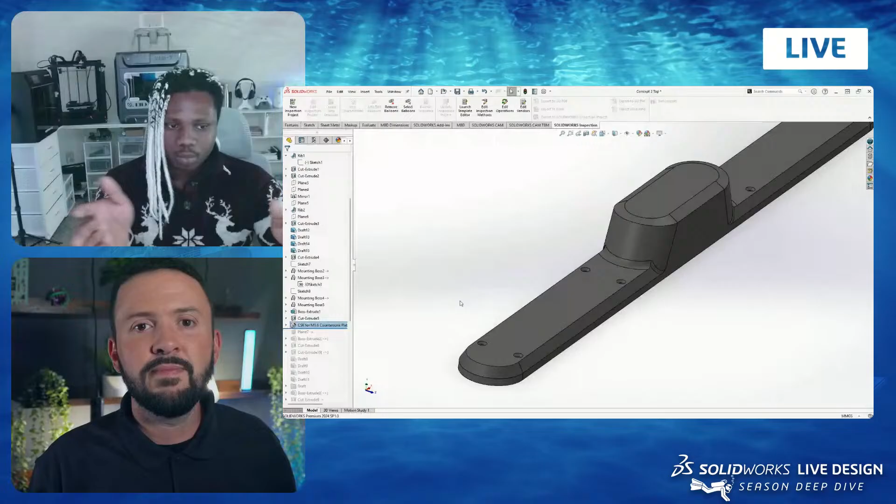So this is basically your whole feature. So there's something I wanted to show. Maybe I'm picking the wrong one, but there's a feature that gives you clearance for screws to go in. SolidWorks has one where you get the exact size, like for this I'm using M1.6, so it has the exact 1.6, and then it has one with clearance for the screw to go in. So basically that's what I do. But I don't memorize most features. I just go in there and play around with them. Give yourself a break, there's a long feature tree. So I see a ton of fillets there to finish it up, I presume. Yeah, I'll just skip through a lot of them because they're basically just generic tools we use.

Okay, so this is actually important. I did a cutout for my USB cable to connect to my module. And then I also did a cutout here, just a slight extrude. So those two on the back, what are those for? Those are actually for magnets. Ah, okay, that makes sense. So I wanted to put in magnets, so the magnet snaps to the other component that's supposed to be placed on your monitor or your laptop. That's the way I wanted to connect both of them. So instead of using screws, I just wanted to play around and try something.

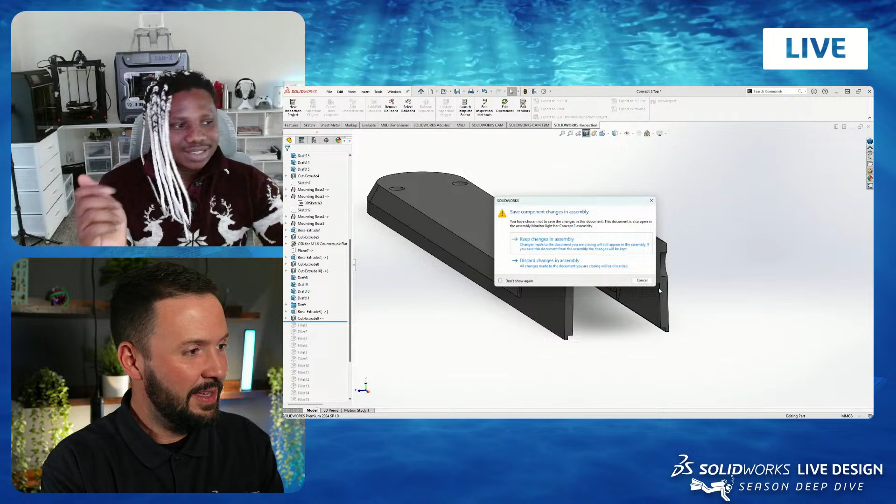Yeah, so that's why I chose the magnet, and I just wanted to experiment with it because I've seen a lot of videos where people use magnets to join things. So I just wanted to try it out, like play around with it.

Oh, sure. Yeah. Oh man, magnets. The more stuff I've built, even I would say particularly around the house, the more I've looked to utilize them whenever feasibly possible. Yeah, they're an amazing asset in the toolkit of anyone making anything.

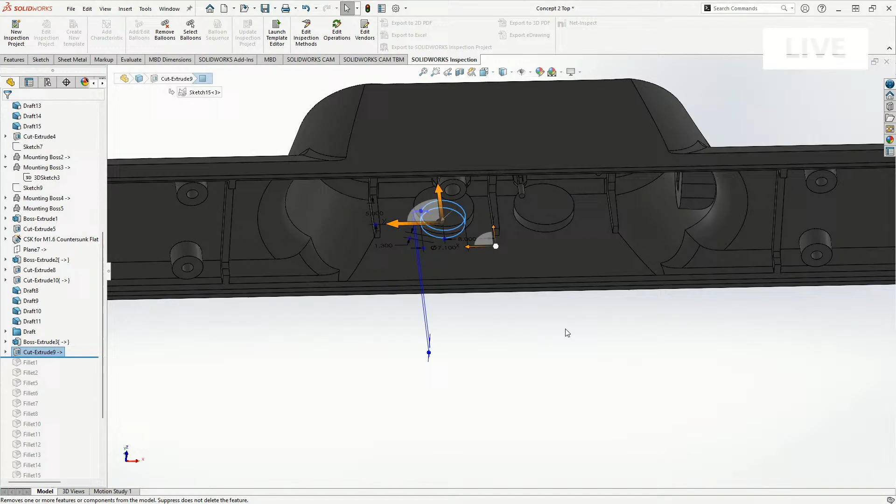Yeah. So when it comes to injection molding, this part I placed here for the USB actually drives costs up, because you have to have features going in that are not in your simple mold top and bottom that you can just separate. So it's not really a good approach, but sometimes you can't actually escape this, so you have to do it anyways.

I see, so a lot of the draft here. What were the draft features added for in this case? Because this is 3D printed, right? Yeah. So like I think I mentioned before, for this design I'm trying to learn as much as I can about designing for manufacturing with injection molding. So I try to incorporate most of the things that are supposed to be in a mold. Oh, I see. Yeah, and that's why I added the drafts.

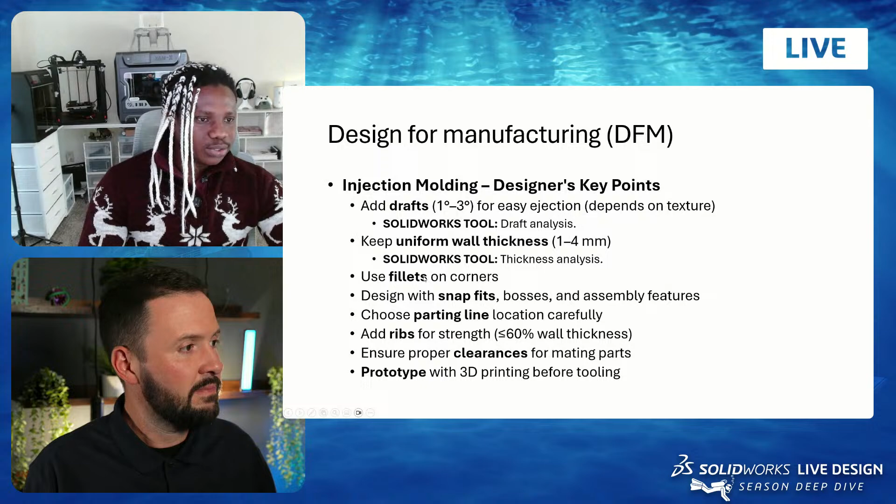And when it comes to injection molding, there are usually draft angles that you're supposed to use. So when you're adding a draft, you have 1 to 3 degrees. This is mostly what's advised, but I've seen a lot of cases where people use 0.5 degree, and some cases where they go up to maybe 10 degrees. It's mostly dependent on what your manufacturer tells you, and it depends on the texture of the material you're using as well, because this draft helps the molds come apart really easily.

So your parts are still okay, because if you don't have this draft, it will be hard for the mold to come out. It will definitely come out because you have strong equipment pulling them out, but it's going to damage your design, and you don't want that. Mm.

Interesting. Very cool. So basically, at this point, you added the draft, keeping true to some of these injection molding tenets, and then also some of the fillets, assuming we're wanting to beautify the model a bit, and also knock off some of the sharper corners, right?

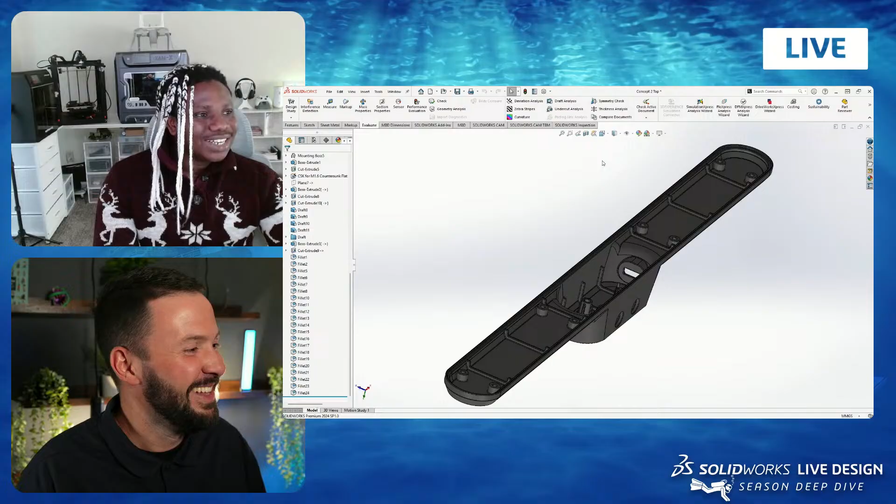Yeah. So one tool that helps me out when you're considering this for injection molding: basically we're done with this part, and what you need to do is check, evaluate if this is actually good for injection molding. At this point, you have a lot of geometry, a lot of faces. Yeah, there's a lot to consider. It's no longer the box it once was. Yeah. So what I normally do is use tools like draft analysis.

So once you click draft analysis, you pick where you want to have a parting line, where the two mold pieces should meet. For this, I chose this place, just to play around with the tool, and then you choose where you're pulling the mold towards. So if it's going upwards, this is the arrow, or downwards, you can change it here. So let's choose up, and then the degree of draft you want to check for.

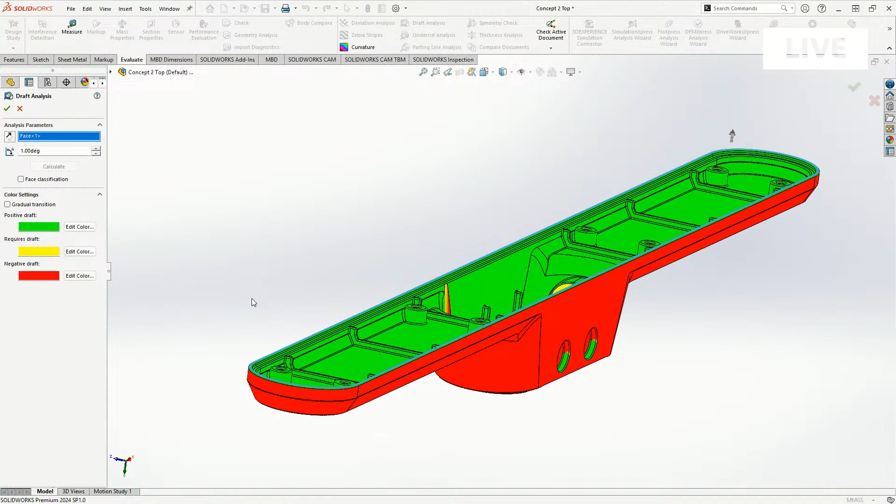So here I normally put maybe 1, because that might be the lowest draft angle I currently have in the design. It makes sure that whatever draft angle you have is from 1 and above. So you click calculate, and the green tells you that all the surfaces are actually drafted and you're good to go, while the yellow is requires drafting. And then the negative draft is the opposite side of the mold, which is supposed to pull towards the other side, because you have two molds pulling away.

And if you switch this, sorry, so you have this negative. So I wonder if the face may have flipped twice, and then when you click calculate, I wonder if it recalculated again. Okay, so if you flip it and do recalculate, there you go. It changes to the other side.

And this basically shows that what I have here is okay. But like I said before, you have problems with stuff like this, which you have to have an extra piece to do, including this. This is going to be a huge problem, because you have to have tools going in here. These ones you can talk about with your manufacturer and try to change stuff. But since I'm 3D printing, I can just do what I want to do.

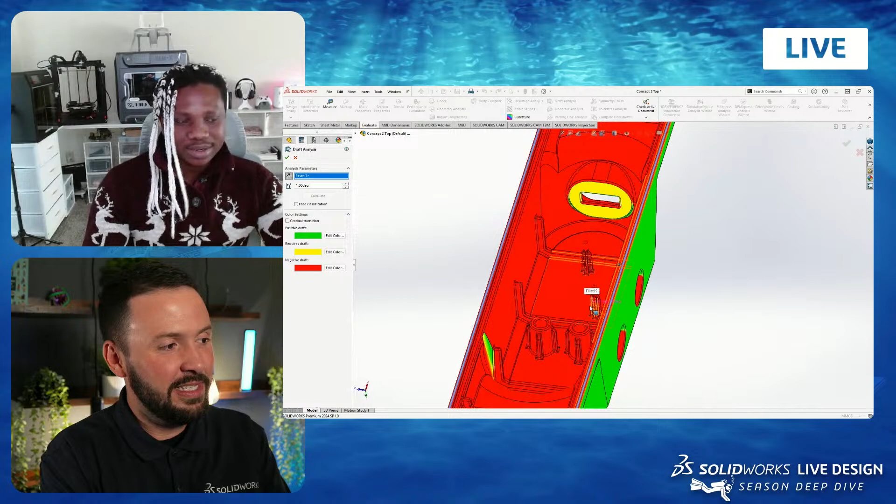It's cool to see that, even though you're not injection molding in this case, you're trying to keep up with proper practice. Yeah. So another thing you have to also consider, you see these edges, they have problems here. So you also have to talk with the manufacturer about that.

In some cases, they could go ahead and make this with this issue and you still have a good part. But in some cases, it won't work out that way. So they actually do a whole lot of plastic mold flow to see what happens, see if you have problems, and then let you know if this can work or not. So in some cases it will, in some cases it won't. Most cases it won't.

Very cool to see. This would be a great training model as well. I think even just this video could be very good for anyone that's looking to get into injection molding potentially. This is a really neat practical model.

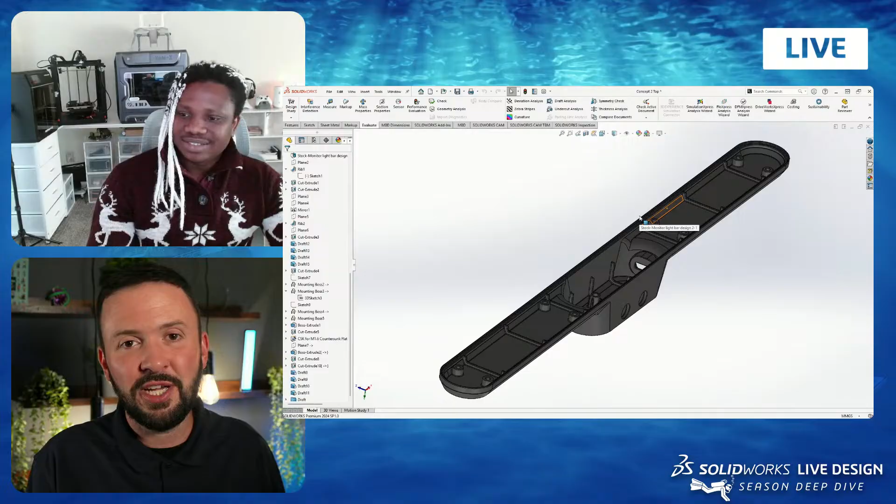So I'll try to go a little bit fast because we're kind of over the time right now. I mean, it's what you're passionate about. That's very cool. But I appreciate the rest of you guys watching. We're past the 1 hour mark, as Sunday mentioned here, but very good stuff.

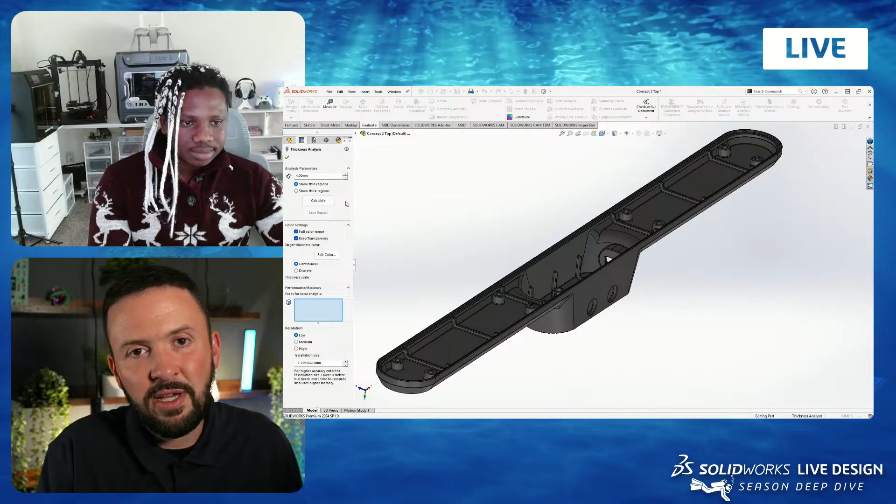Of course, like you said, if you just made the part yesterday and you were very cautious, then somewhat reliably you're probably fine given whichever requirements you have, some of which you've mentioned for different types of parts and manufacturing methods. But sometimes you made the part a month ago or longer, or someone else made it, or it's an imported part. So having this tool available, which does work with imported parts and neutral file formats, is really nice.

So I basically just use the thickness feature the way it is. Here you have two options: show thin regions and show thick regions. It tells you if you have components with wall thickness less than 4 millimeters, or wall thickness that is greater. Here I'm trying to limit between 1 and 2, but it could go up to 3 depending. So that's why 4 is a good way to go.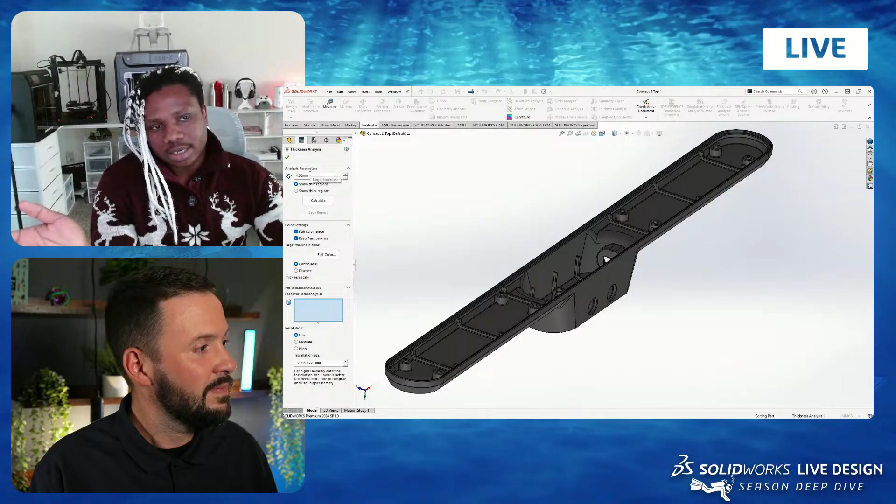And then I say show thin regions. So it calculates, and most times this doesn't take long. It's way faster than this usually. I'm guessing it's because I'm running kind of low on memory or something. It's going a little bit faster.

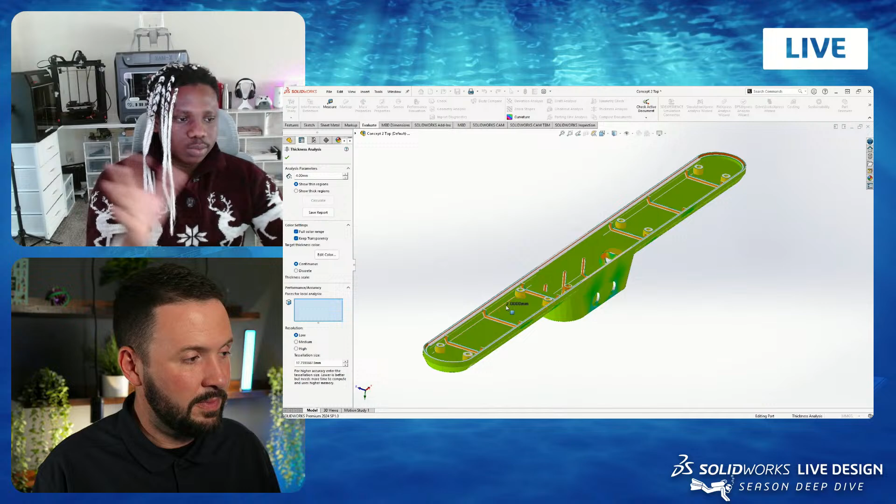So basically, once you do this, you see different colors, similar to draft analysis, but this you have way more colors. So this is what you have, and then there's supposed to be a bar right here that shows you the color scheme and then the dimension, the value limit, but you can just go around and see what you have. So all this region, you can see 1.9 millimeter, and you have this 1.9. Most of them, this is 2, you see. So it's within the range of 2 millimeter and 1, what I wanted. So you're good to go with this.

Yeah, and I think my audio cut out there, but yeah, it's a great tool. Like I was mentioning, I think for all sorts of reasons, imported parts. But yeah, you mentioned it usually does run pretty quickly.

And this part, it's so interesting to me sometimes how some parts that might look simple from the outside, especially just the exterior, are not as simple, right? When you look inside, especially injection molded or injection molded looking parts, you have a lot of faces, a lot of edges, a lot of stuff going on in the interior, of course, to give it structural stability, to have different channels for fasteners, different channels for cords, in your case, magnets. There's a lot of stuff going on. So, cool. The evaluate tab's full of great tools like this.

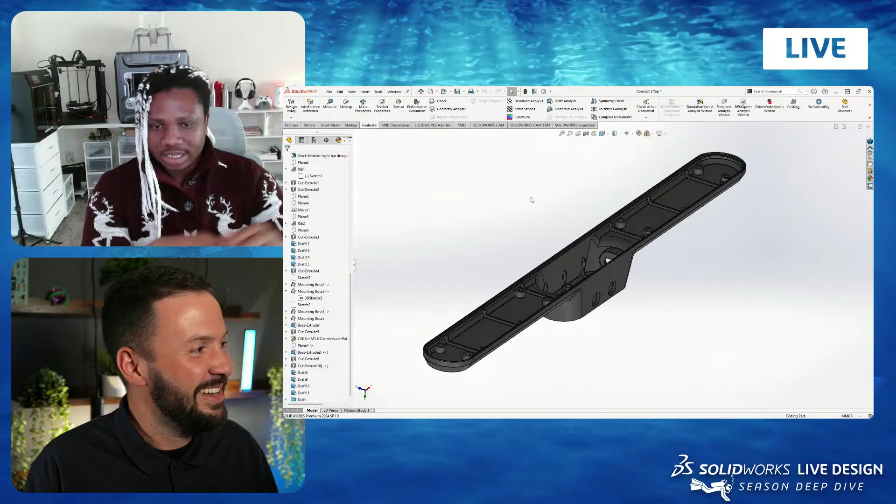Yeah. So we also have this undercut, but I'm not going to click it because the thickness feature took a lot of time, I don't want to try that right now. The undercut is useful for when you're using snap fits to put in place. It tells you if it's a good position where you can injection mold it easily, or you need to put a cutout. It takes more time than most of the features we have here. You actually get a better explanation if you go online and check it. But basically that's what the tool does. It's mainly for your snap fits.

And one of the reasons I didn't use snap fit here is because this is a very small component, and I'll be using a 3D printer, and 3D printers are not really that great for snap fit features, especially when the snap fits are going to be very small. So that's why I decided to use screws instead. That makes perfect sense to me.

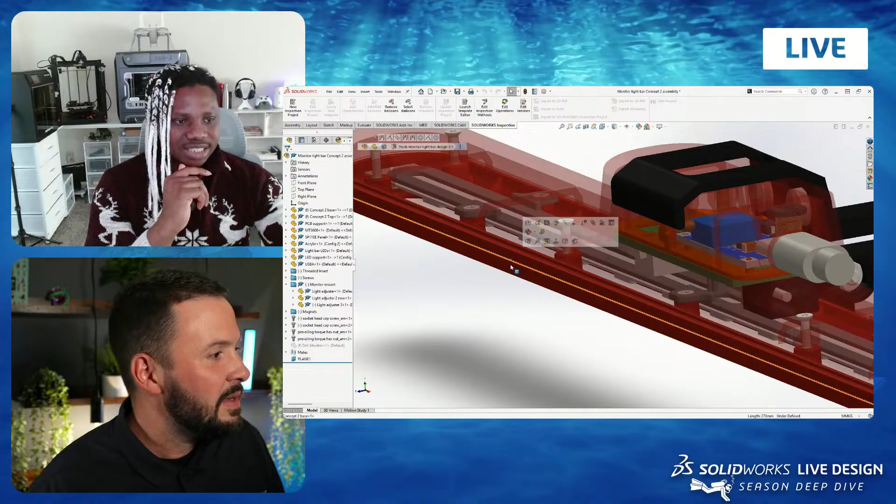So now we're going back to the assembly model. The base part is basically the same as the top part. It has fewer components. So the same draft analysis you do here, and this is actually way easier because everything is just perfect for injection molding. So you don't have a problem here. I won't go through this because I already showed all the features with the top part. Yeah, I was just looking at the feature tree. It seems pretty similar. It seemed like you had most of your base stuff already done, then you added some draft, added some fillets, and capped it off there. Yeah. So let me hide this.

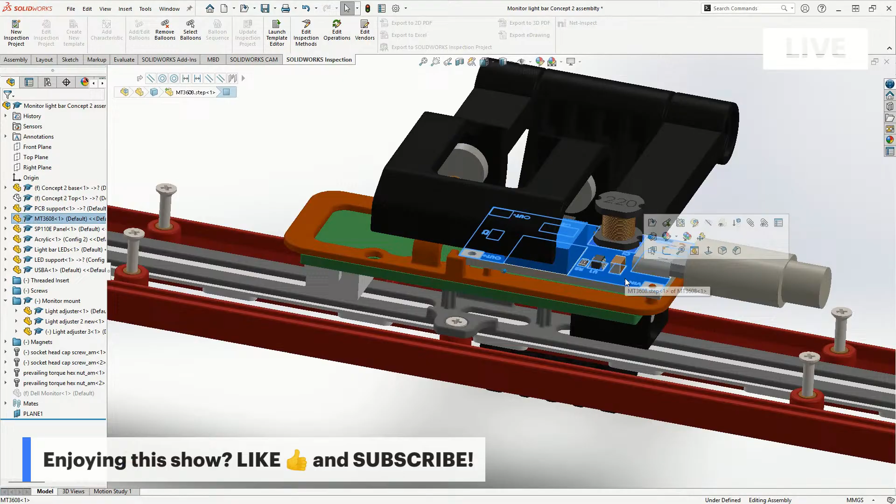Now, when you come to this model, you have to place most of your electronics. In some cases they normally use glues or fasteners, but the components I'm using have holes too small for me to use a screw, so I had to find a way around it. So I tried to design parts I could use to hold it. Oh, I see. So you had to make custom little bits of hardware. So this actually holds the DC converter, and then you have these pins to support. That was smart. Yeah, and this pin was actually made using that same boss feature.

So you can easily put that in there, and then you have cutouts here, so I can do whatever I want, and there are holes here to connect this to the top piece. So this connects to the top piece, and this I actually use glue to hold it to this base piece, and then I have this piece down here to help support this, so it holds it in place. Since the glue is already holding it, this kind of supports it.

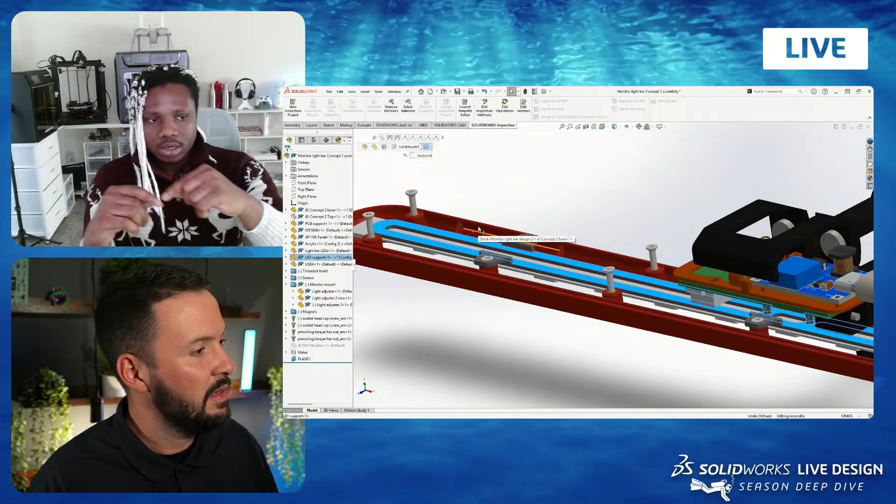And then this was actually done because the LED strips have a glue under them that you can use to glue to something. So I designed this piece so I could glue the LED strips there, and that would hold it, and then screw it here. And then there's an acrylic sheet, like I mentioned before, that's here, kind of transparent.

So this is it, it's the blue piece. Okay, so you've modeled the clear piece. Yeah, so it's actually transparent because I added the acrylic material to it.

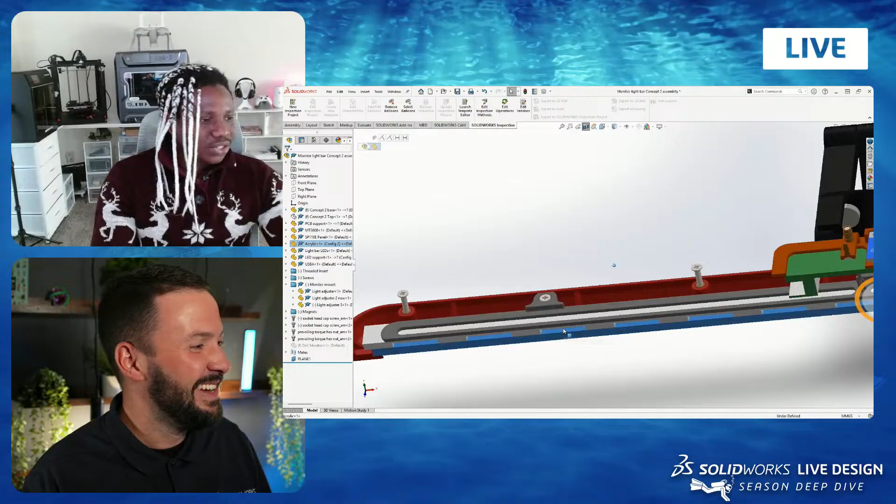Gotcha, so once I click it, you see it. The dynamic highlighting showed me, but otherwise I wouldn't have seen it, I just would have thought it was empty space, because I added a glass feature to make it transparent.

So once I put everything in place, I can just mount everything there. This is what connects to the monitor, and it moves so you can adjust it, and you have a screw and stuff to hold it, and based on how much you tension this, it will be harder to move.

One thing I considered here when designing this was also injection molding it. And one thing is, like I mentioned before, you want to maintain a particular thickness, and to do that, this has to have somehow like fins, so you have that.

That was exactly going to be my question, I was like, what's up with the shape here? Yeah, so I have uniform thickness with what I want, and then I don't have to go against the injection molding rules or something like that.

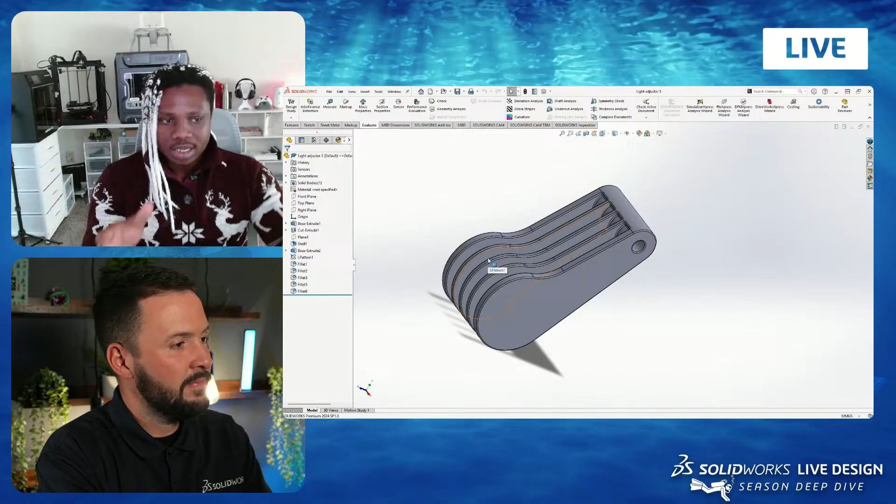So it's easy to manufacture, but I still have the surfaces all around to make contact with the monitor I want. That's part of what I consider, and probably along the line I'll still make adjustments to it. This project is still something I'm working on, making a lot of changes, because when you actually 3D print parts, you notice that this doesn't fit well, and then you have to make changes.

I do actually have some components I've 3D printed, and mainly the place I have problems with right now is just this and this. I haven't 3D printed this other piece because these are really small components, and this is a small design, and I'm trying to fit everything. So mostly I'm having issues with this being too small, and the 3D printer doesn't really print it well.

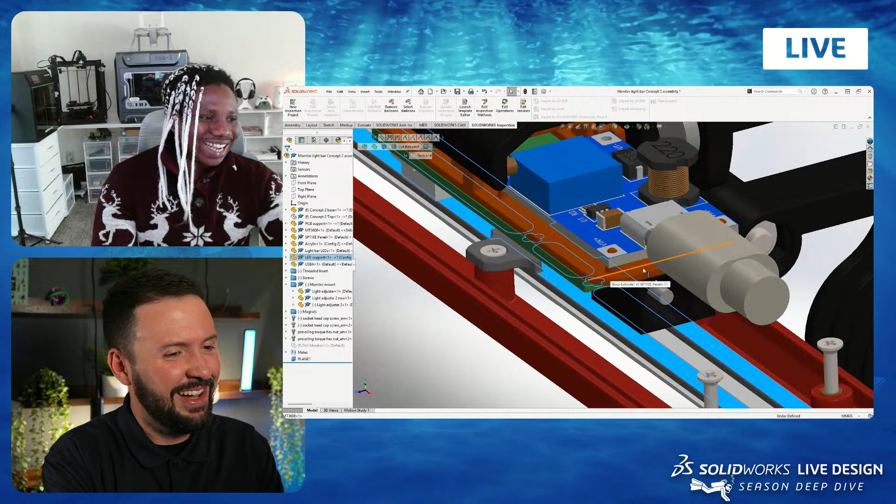Yeah, I know exactly what you mean, it's an age old problem, right? Maybe a byproduct of CAD design. This isn't necessarily a problem, sometimes it can be a nice thing, but you can make anything as big as you want on the screen, and then it looks fine.

Like I always mention, your manufacturing method plays a big role. I could 3D print this on maybe SLA printers and get a really fine, good part, but for FDM not so much. So if I do this with SLA, I might have a really good print that's good to go.

If it's okay with you, I would like to show some of the parts I have with me here. Yeah, let's do it, I'll show them full screen and everyone can take a look. Okay, so I actually have them, let's take a look here.

So this is the base part, and as you can see, you have the threaded inserts in there. This is the moment where we're all thinking, 'Oh, I've seen that before somewhere.' It was only in CAD, now it's real. But I see, okay, so I can see even as you rotate it, I can see the threaded inserts.

Yeah, so they're kind of brownish or something. Yeah, I see them. So I actually did this using a soldering iron, heated it up and then melted it in there. That's basically what I had to do for this part before putting other components.

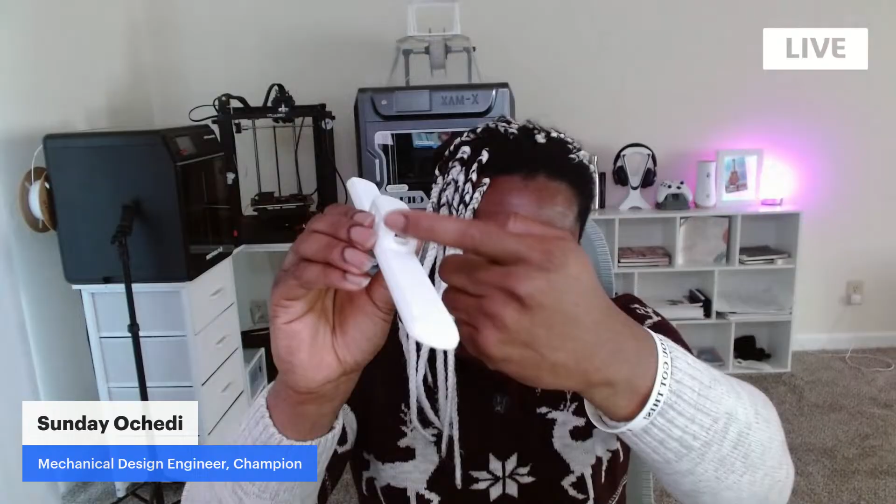And then the top part, this is the top part. So you have the ports, the magnet holder area, and I also have two threaded inserts there. This is meant to hold the support I showed before, that's supposed to hold the DC to DC converter.

So that's where you put it on, and then you can connect other components to it. This is the support for the DC converter. You can zoom in to look at it closer.

I brought you back here because it's such a great illustration. You're holding it up in your hand, and you can zoom in for as long as you'd like and make it look as large as you'd like. But at the end of the day, it's this big, and that's what it is. It's very small, and seemingly thin too. It's very thin, and it can be potentially fragile.

That's why dimensions play a role, as well as the material you're using, and the manufacturing plays a big role. I guess because this is really flexible, but it doesn't...

I'll make you full screen again. Yeah, it's very flexible. I'm guessing it's because maybe it's PLA—you could use some other material that might be stronger, but for this purpose, it does what I want. You could play around with the thickness, but the dimension is like a big constraint for me. I'm trying to make it as compact as possible, so I just have to play around and squeeze it in, not too brittle.

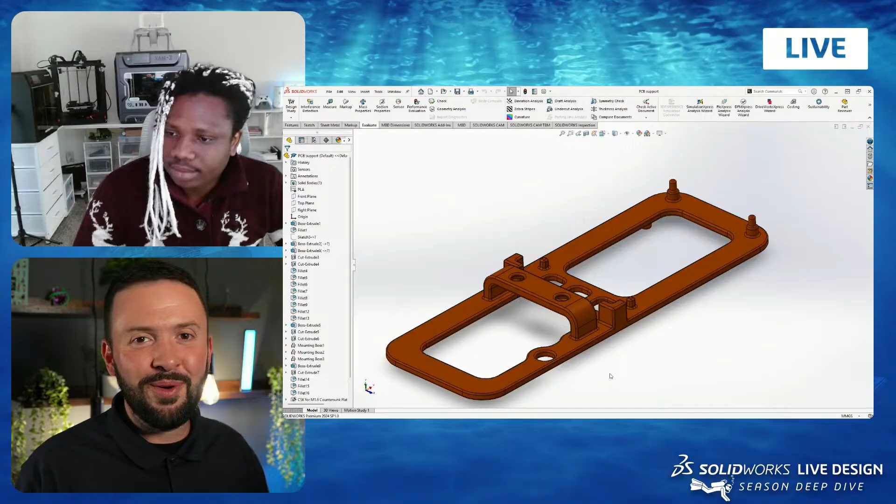It's like this is the point in the show, like at the end of a play or something, where you see the actors and think, oh wow, these guys—we watched them the whole time.

No, it's cool to see the components that you've printed out, and also good to know we're kind of seeing it. It sounds like you're 85 to 90% of the way there.

I just have to do a couple more prints and then tune it in. There are cases where I do a design and everything is completely okay—I print everything, it fits, and it's just good. But most times, like 90% of the time, you have things you have to go back and change. I think one of the designs I worked on, which you showed, was the headphone stand.

What's it called, headphone stand? Oh, yeah, that's a design, isn't it? Is that it in the background? Yeah, that's it. That's a design I did.

I actually printed it once and the two components fit, and that's basically because of experience. I have basically just two components: the black piece, which is kind of like a V, and then the main body. I just used the experience of how I know my 3D printer clearance and added it, and it's fitting okay—it's like a perfect fit. You don't even need to use glue, you just press it in there and it fits. It holds up, so that's nice.

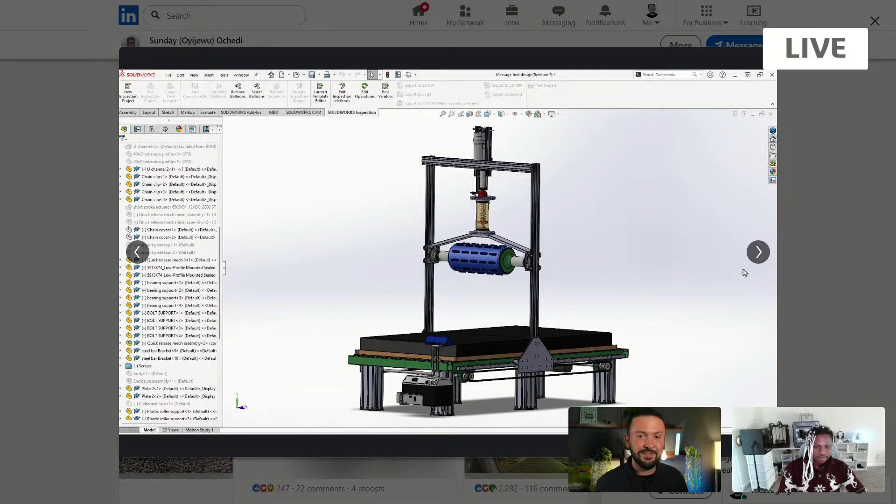Check out your LinkedIn—that's how I came to know you and became aware of you. And of course we talked since, but you have a lot of really interesting, diverse designs. Some enclosures in there, and I believe a pill organizer, a portable SSD—a lot of different stuff here.

I try to do diverse projects just to improve my knowledge about stuff, and I try to target mostly students on my LinkedIn page, because I know how hard it is to find information online, and most things I actually learn late.

So I try to engage with people. As I'm learning, I'm sharing, and a lot of students actually hit me up on LinkedIn, send me messages, and I try to reply back. If I'm unable to, maybe later when I'm going through my messages and I see it, I just send them a message back. It's quite good to connect with them.